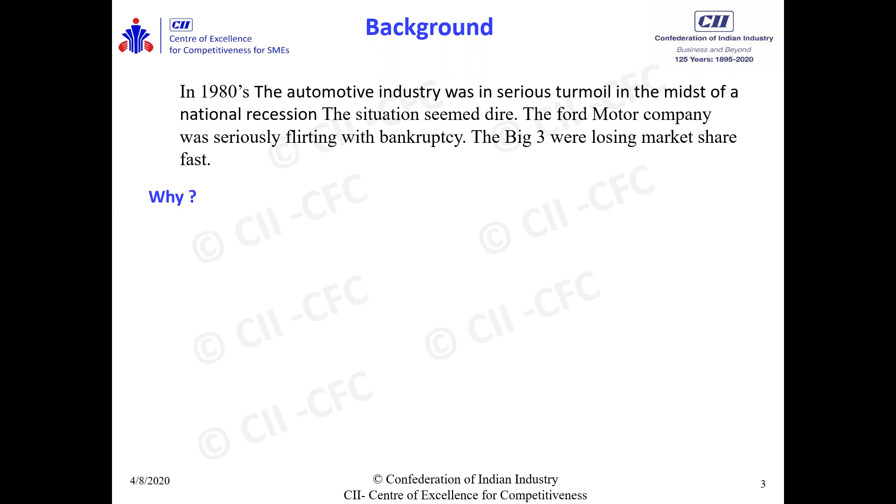So why do we need to study a Toyota production system? We'll understand this first. I'll give a background of how Toyota became important, back in the 1980s. I'll give a scenario in the 1980s when the automotive industry had a serious problem with respect to business. There was a big recession going on, and the big giants like General Motors, Ford, and Chrysler were struggling in the business.

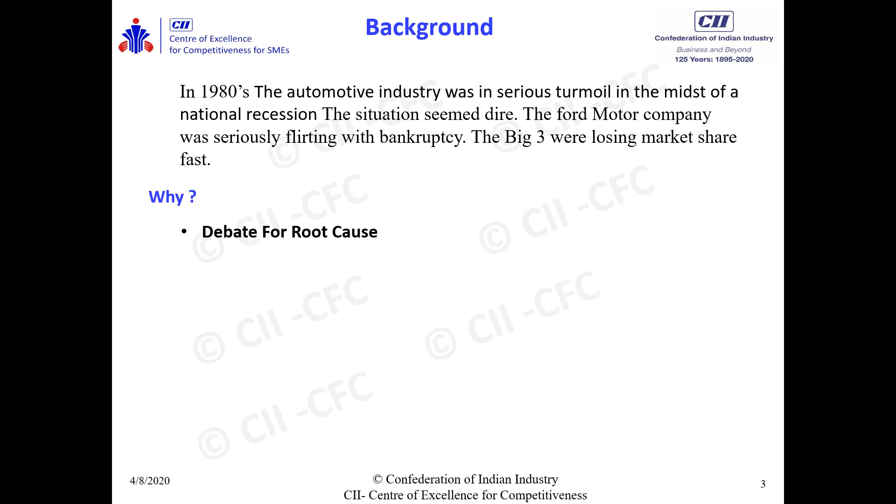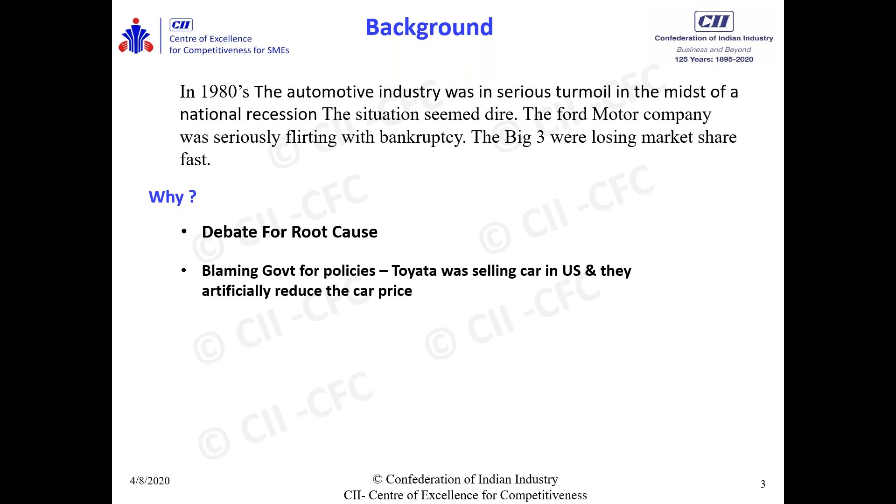They were on the serious verge of bankruptcy, and at the same time Toyota was doing good. When the debate was going on about the scenario happening with all the big three giants leading the auto industry, the debate was on root cause, and they started blaming the government, because Toyota was selling cars in a big way and doing good. So they thought this was an artificial reduction of car prices. This is again very important to understand.

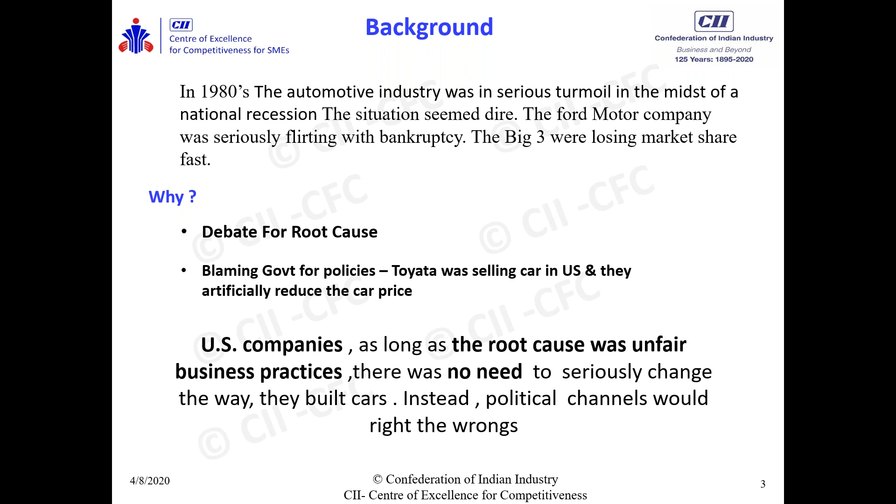So they put all the dimensions, or rather the thought processes, beyond their own purview - we normally call this an external factor. If we consider only external factors and not internal factors, the opportunity for improvement will not be there, the thought process to do something will not be there. That's exactly what was happening with all these big three. They also thought the root cause was unfair business practices, that Toyota was intentionally doing this to grab market share.

By the time they understood this, it took 10 years, and they woke up. They understood the Japanese quality and concluded the quality was good, and concluded they had to internalize why they were in a bad state. They started benchmarking the production system, product development system, supplier relationship management of Toyota - the entire process they were able to expose about Toyota, they tried to study during that time. It's not only an external factor - only blaming the government will not solve the problem. They had to understand the nitty-gritties of how others, how Toyota, were doing good, and then do a course correction on that.

At the same time, around 40 Toyota managers working in the US got interviewed to identify how they were working, and what mode of principles they were following.

So, at the same time, in 1991, Mr. John Chappell and Jeffrey K. Liker were assigned a job to create a case study to understand in totality what the scenario was at Toyota.

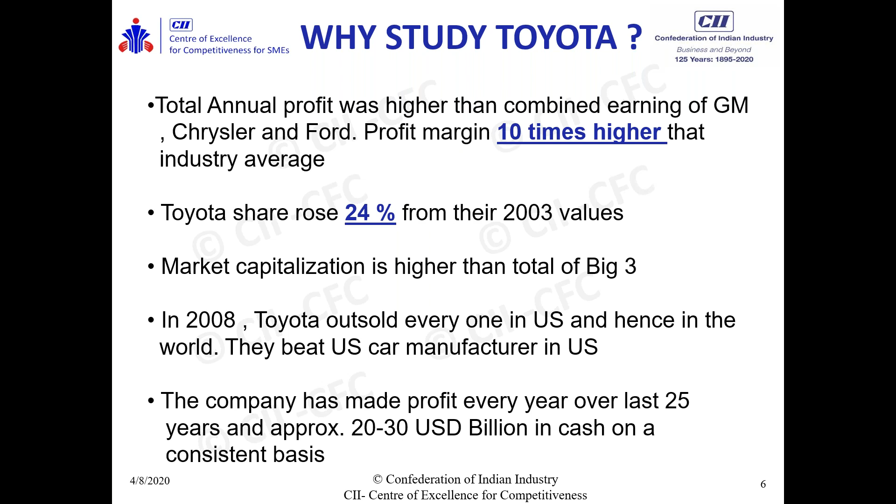endorsing that Toyota's system is good. Toyota Lexus was #1 in the world, followed by Porsche, BMW, and Honda. Not a single Toyota car was in the list of vehicles to avoid. Vehicle to avoid means Toyota was meeting all the safety norms needed for a car, and they are not in that list, and that is also visible there.

So it's a financial gain. Another one is quality, and the third one is the safety of the product. So in all dimensions, Toyota was doing good.

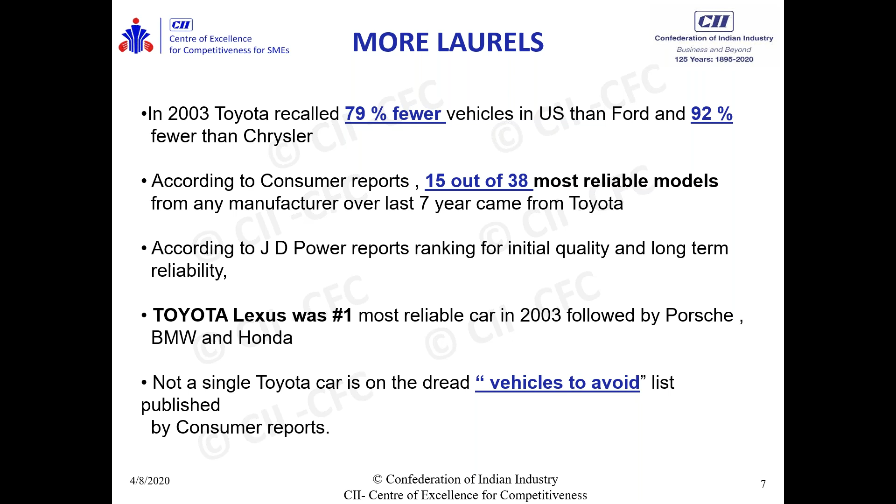So this is important for everybody to understand how Toyota made this big change. Taiichi Ohno believed that what is important is having elements together as a system. It must be practiced every day in a consistent manner.

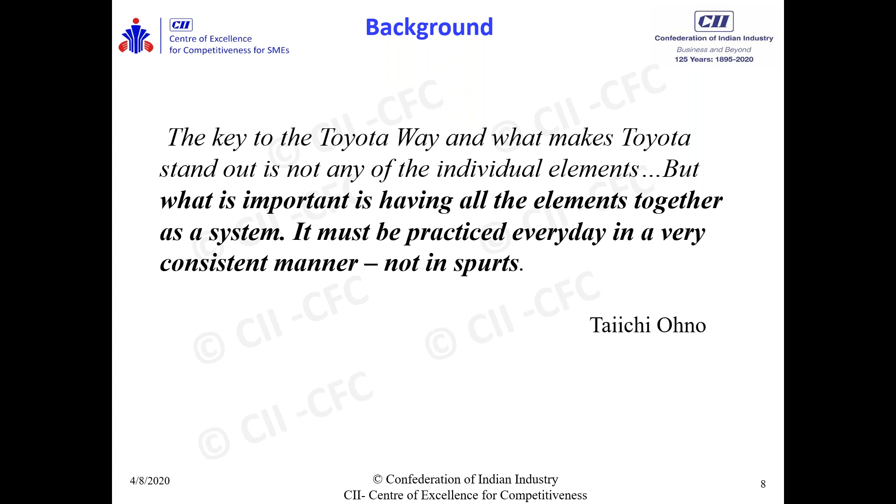It's very important, from the entire business operations or business processes, to identify every individual element—important or not important, it doesn't make any difference. Whatever system we design should be practiced every day in a consistent manner, not situationally. Because if we talk about quality, in normal practice we are not consistent in practicing the system. If we become consistent in practicing the system, nobody will stop anybody from growing. This is what Taiichi Ohno said.

We always talk about competition, and competition is changing day by day. There was competition, there is competition, and there will be competition. Even during the COVID period, we learned a lot. So the scenario is changing, and challenges are getting reframed—challenges also come differently as time goes.

Market leaders who are there today—we witness many leaders are not there anymore. Many people become a leader overnight, in a very small span of time. Opportunities are huge. People are coming up with different business models, exploring how business can grow, or how new dimensions can be brought to a business.

So if we don't think about this competitive age today, if we are not adapting the best practices that the entire world is following, we will not be there in the market. So when we say this is a competitive market, we need a holistic approach to see all the dimensions. So let me tell you a history of Toyota.

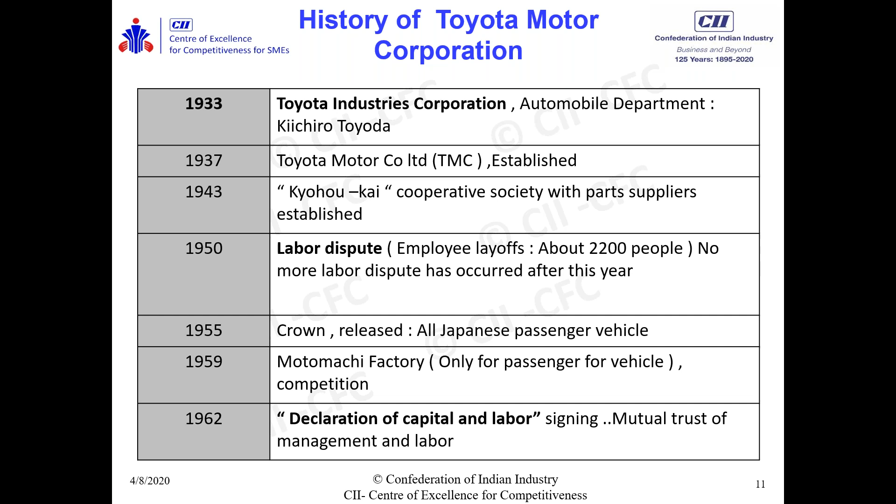So largely they are leading in many aspects. If you see, they started practicing TPS in the real sense. They adopted the Kanban system, they worked on inventory. Taiichi Ohno had good real practical implementation on the shop floor. They grabbed the Deming Award. They had a joint venture with General Motors in America—that is what I said, in 1984.

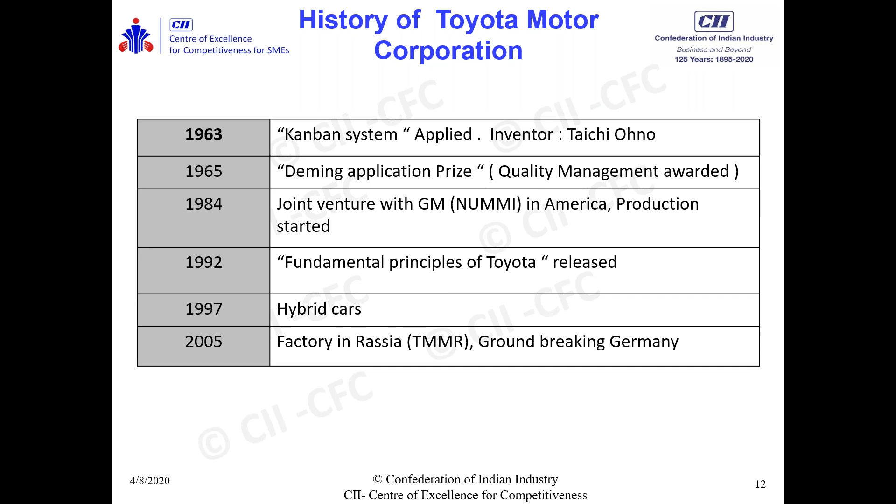Jeffrey K. Liker and two other university professors started doing a study with the managers when they got an opportunity during Toyota's business in Germany. So in 1992, the fundamental principles of Toyota got established. They also evolved hybrid cars, and the journey went on.

The Toyota production system was developed through tireless trials and errors at Toyota. They did a lot of work to establish the system. If you ask me, many companies have visited Toyota, but they don't become Toyota. There is a reason behind it. It's all about culture.

If I quote Taiichi Ohno, he also says all elements together in a system should be practiced, and it should be in a consistent manner. That is what culture is. That is what discipline is.

Sakichi Toyoda is the founder of Toyota Industries. He is also called the father of the Japanese industrial revolution. He started his career in loom manufacturing, and he is the founder of the automatic loom at that time.

The approach of learning and becoming an integral part of TPS, that Genchi Genbutsu, we'll discuss that. He invented a special mechanism to automatically stop the loom whenever the thread broke, whenever there were quality issues appearing, so the machines could automatically get stopped, evolved by Sakichi Toyoda.

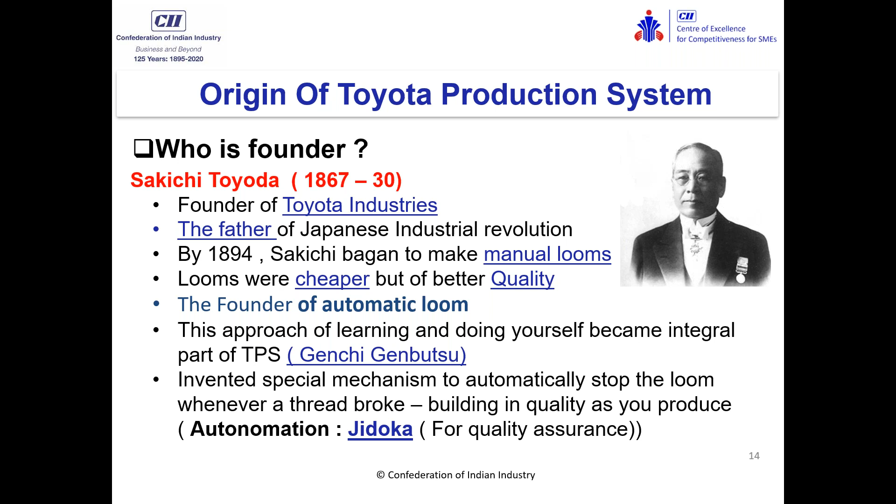That we call autonomation. We'll discuss about that, Jidoka and autonomation and all.

Kiichiro Toyoda was the founder of Toyota Motor Corporation, the automobile industry. So if you ask me, TPS got started and evolved from a loom manufacturing company. It got established certainly in the automotive industry, but TPS is not there for only automotive industry. We can practice all types of excellence practices in any type of industry. Who is manufacturing what doesn't make a difference. What's important is the methodology, tools, how to practice, how to adapt.

Mistake proofing, he brought mistake proofing into the organization. The most important thing was how he could build the plant, how he was able to put up the plant. Because he negotiated and sold a patent worth one lakh pounds to Platt Brothers in England, and he started putting money into building Toyota Motor Corporation.

He pursued production efficiency by JIT. If anybody has any question, they can raise it in between.

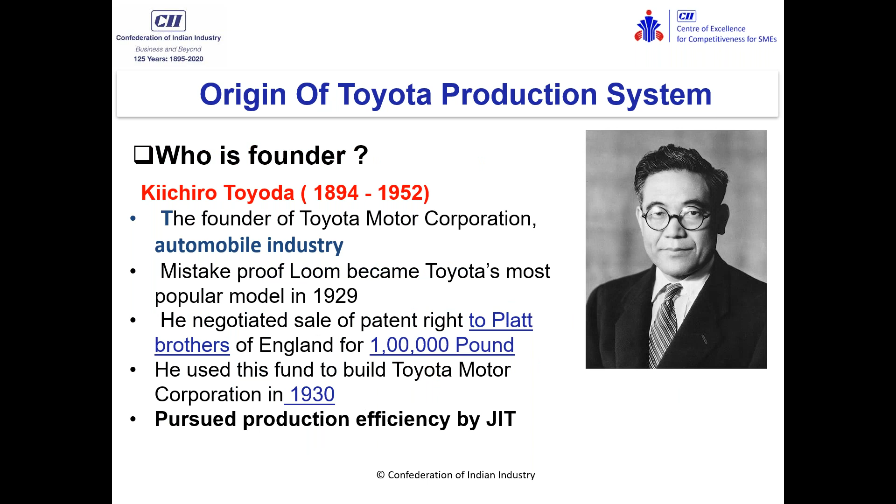So, when we are talking about Sakichi Toyoda and Kiichiro Toyoda, the real person who brought all these practices onto the shop floor is Mr. Taiichi Ohno. With support of Eiji Toyoda, Taiichi Ohno established TPS and created the basic framework for the just-in-time methodology, ensuring implementation of Jidoka and just-in-time methods and increasing productivity.

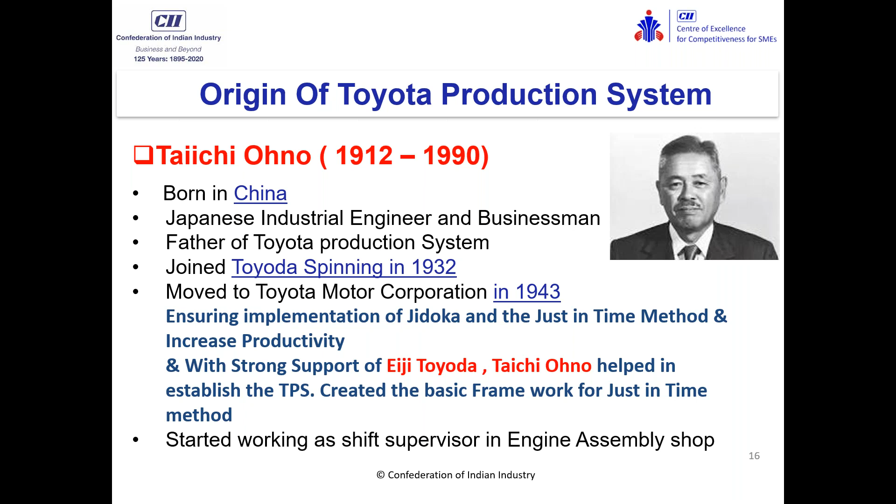The companies were able to see a result out of these practices. The start of TPS was, again, as I said, in the 1950s, they had labor issues. 2,200 employees were laid off. They had cutbacks. In Toyota's history, that was the first time this had happened. So the company pursued the importance of increasing profit, which became very important.

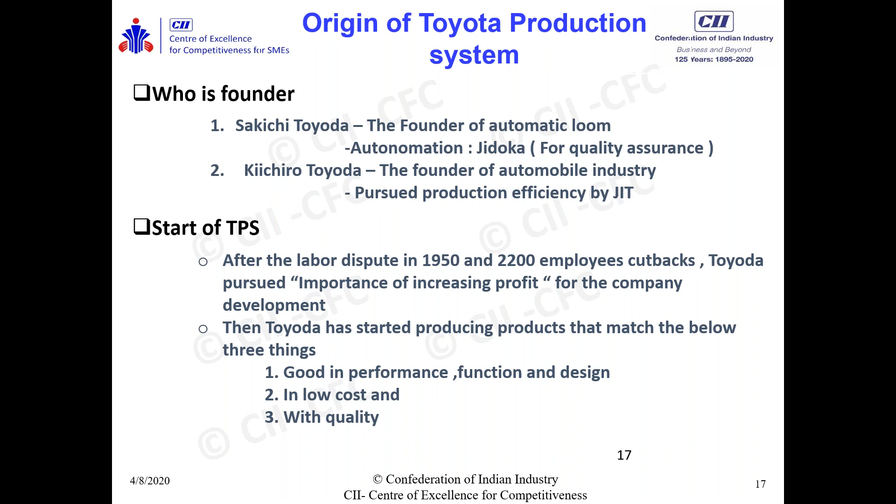Then Toyota started producing products that matched three important aspects: good performance, function, and design. It should be at a low cost and should meet quality standards. So if you ask me, performance normally means fit, finish, function, and aesthetic - all important, and it comes through design. So when it comes to product design and process design, in line with customer needs, it should be at a lower cost with the best-in-class quality.

So what are the principles they were working on? The cost principle was, as earlier, selling price equals cost plus profit. So profit was decided by the owner, cost is the actual cost, and the selling price got decided. Everybody knows this - deciding selling price by the management, not by the customer.

That is the cost principle. The non-cost principle is selling price minus cost, and selling price minus purchasing price minus production cost. That is what is variable cost or fixed cost, which we'll talk about.

So customer decides a selling price. This is a scenario that has changed. We need price setting to meet customer willingness to pay, to reduce production costs, and to create a shop floor that has a motivated employee who can contribute to reduction in manufacturing costs.

So there were three scenarios. Selling the product at a higher price than others. Another scenario is procuring parts and raw material at a lower price, with equipment which is cheaper, may or may not be capable, and labor at a lower price, lower cost. This is the second option.

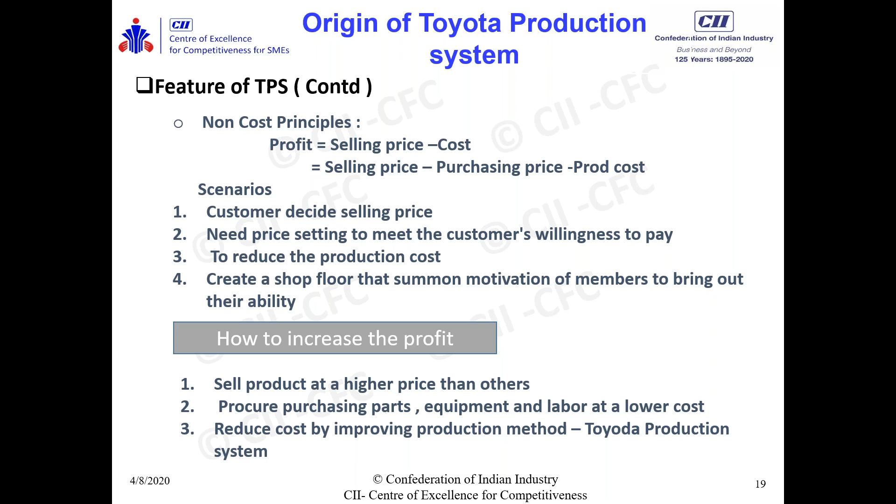The third one is reduce cost by improving the production method. That is what the Toyota Production System is.

So what about the initial two? If you see, selling price depends on market is difficult to deal with. If you are deciding on raw material, that will be in our control, we'll decide raw material cost, which equipment, maybe low efficient equipment, and labor at a lower price is not possible. It needs mutual understanding, and it's really difficult to deal with. So the only option remains is to deal with the cost, and that is through the Toyota Production System.

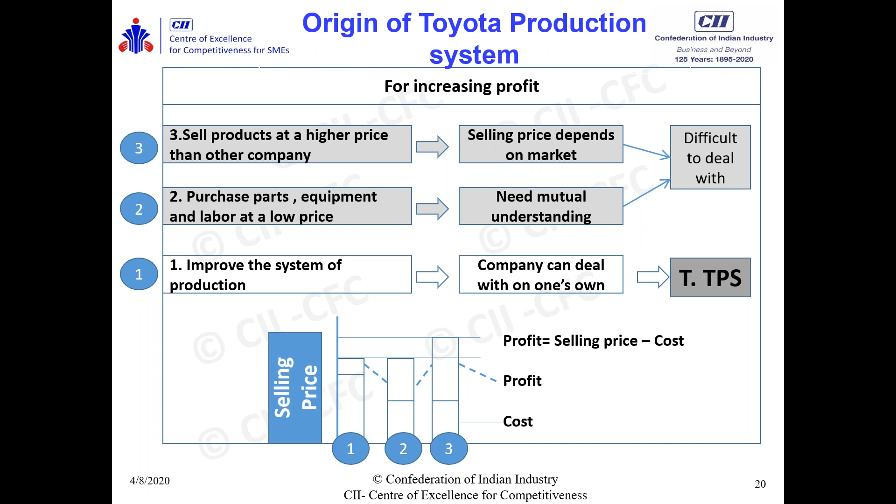So Toyota Production System evolves in phases. One is Toyota Production System, another is Toyota Production System in totality, so total TPS. We'll discuss that. So this is the cost principle we discuss.

Survival and prosperity is very, very important. Social responsibility and contribution is also important. So while working on cost, we have to address this, and we'll be able to be very competitive if we are addressing the basic fundamentals of Toyota, or fundamentals of excellence practices on a shop floor, or whatever way it does business, it will be helpful for everybody to build a profit.

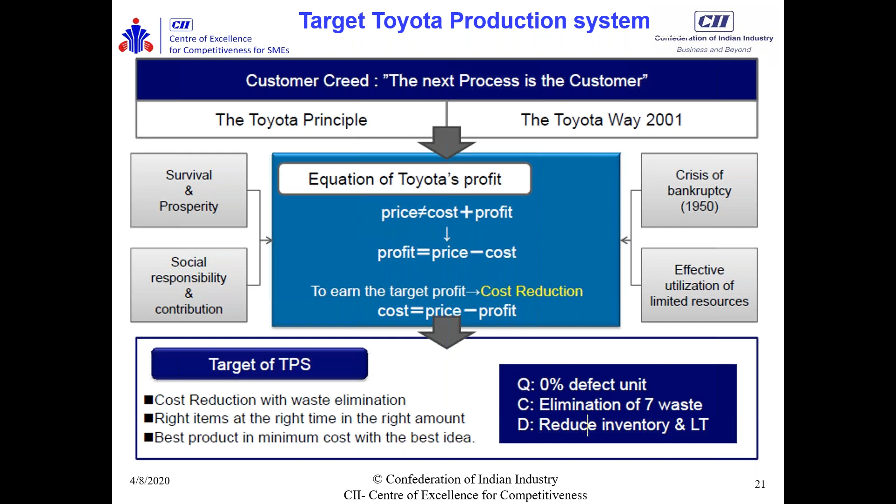So what is the target for TPS? Cost reduction through right item at right time, delivery on time in full, best product at minimum cost. Quality, which is zero defect quality, should not have any defect in the product. Cost is optimum, which the customer is ready to pay. Delivery is on time in full, when customer is asking we should be able to deliver the product. So that is QCD. When we talk about competitiveness, we always talk about quality, cost, delivery.

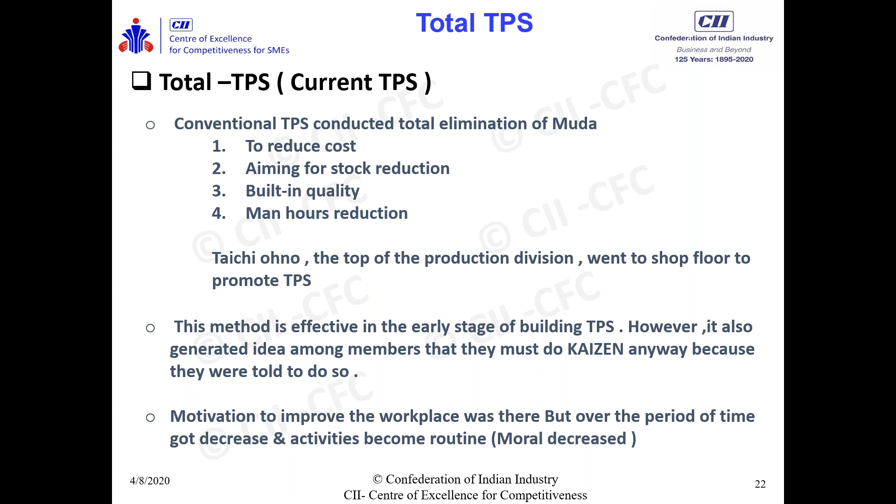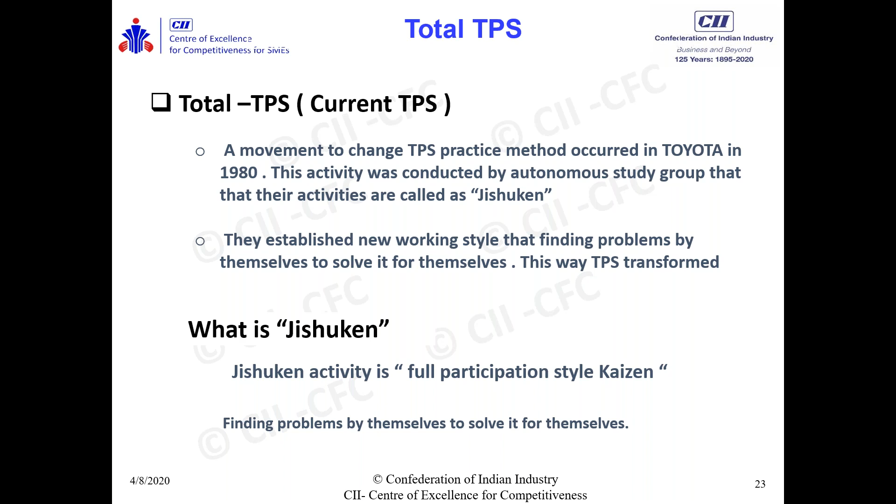So there was a movement to change the TPS practice method in Toyota in the 1980s. This activity was conducted by an autonomous study group, and that activity is called Jishuken. So Jishuken is all about full participation style kaizen. Full participation means everybody in the organization should participate in doing improvement. That is how Jishuken evolved. So finding problems by themselves and solving by themselves, this is also a mantra while doing this. So this is Jishuken.

So we normally say find it, fix it, it is one aspect of it. So TPS was talking about high quality, stock minimization, and cost reduction. High quality means build-in quality in every operation, and that was through Jidoka, more about visualization, adaptive control, and poka-yoke.

We also talked about when we need zero defect quality, we should build a process which is a zero defect process. The process should not have any element by which the operator can make a mistake. The error possibility which is there in the system or operation, we should eliminate that possibility. For that, Jidoka is the system, done through visualization, adaptive control, poka-yoke. There are many such tools available today.

Now stock minimization, so inventory. Stock is all about inventory. So many companies must be working on inventory, people must be monitoring ITR. If you ask me what ITR indicates, ITR shows the efficiency of the people. If you agree, you can raise your hand. It's the efficiency of the people who are buying the material, and it's the efficiency of the people who are manufacturing the operation. That is what ITR is.

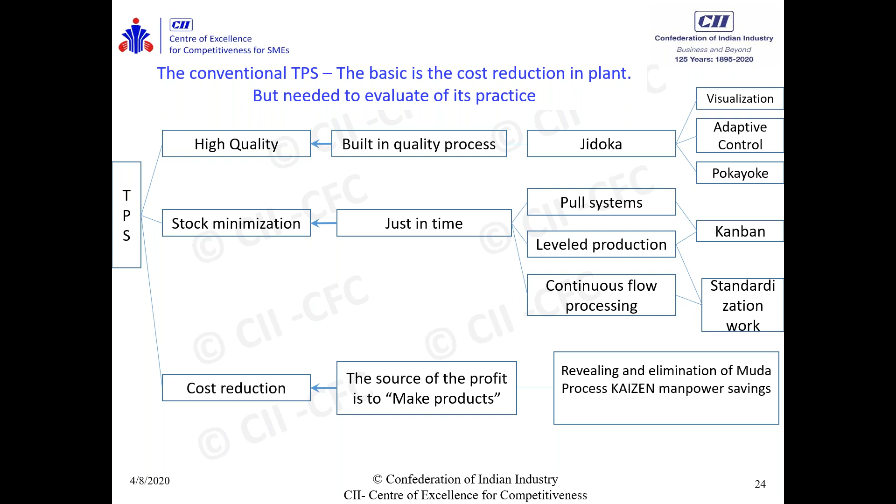If you ask me, conventional TPS and total TPS, there is a transformation. In particular workplace, the model process practices TPS in all divisions. Earlier this was only for production. Now this is total TPS in all functions of the business processes.

Even today, many industries are only demanding Kaizen from the production shop floor. There should be Kaizen in all functions. So are we demanding Kaizen or improvement in all the functions? The answer should be yes, and that should be the focus way we should do it. That is what total TPS is.

There is a system to involve employees. Earlier, uncooperative Kaizen or stretch Kaizen work was happening. Now in a very focused way, Kaizen lists have evolved - how to evolve a Kaizen, how to identify a Kaizen, how to identify opportunities for improvement. There is a separate session for that.

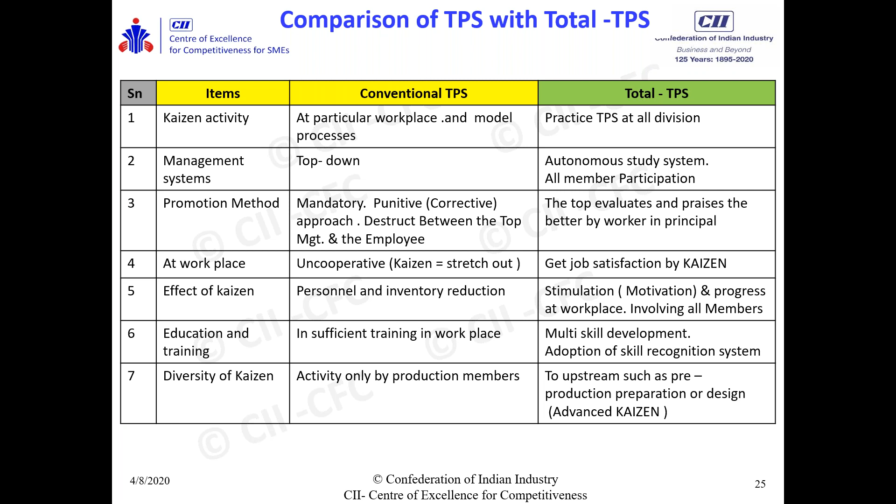TPS consists of three things: one is just in time, Jidoka, and process Kaizen. That is what is even mentioned. We'll have some brief discussion about all these three.

The TPS evolution from conventional TPS in particular manner involves stimulation of the workplace, and pursuing job satisfaction by Kaizen that involves everyone in the organization. When we talk about stimulation of workplace and pursuing job satisfaction, what largely comes to mind must be workstation design, ergonomical workstation design. That is what is stimulation of workplace, stimulation of work where the operator gets involved.

It is in various functions. People have to have their job satisfaction while working there in the organization. It's not like - even in many companies today, workplace stimulation doesn't happen. Even when a new product comes in, or any new operation needs to be evolved, or we need to put one operation there in the process and need a table.

Normally it happens like somebody - a carpenter or welder - is designing, somebody is making a sketch, they are preparing it, and it's directly coming to the shop floor. It's not like that. It's really giving a thought process in a standardized way to design a workstation which is ergonomical in nature, which will give job satisfaction to the employee, which will also help the employee to give more ideas to improve.

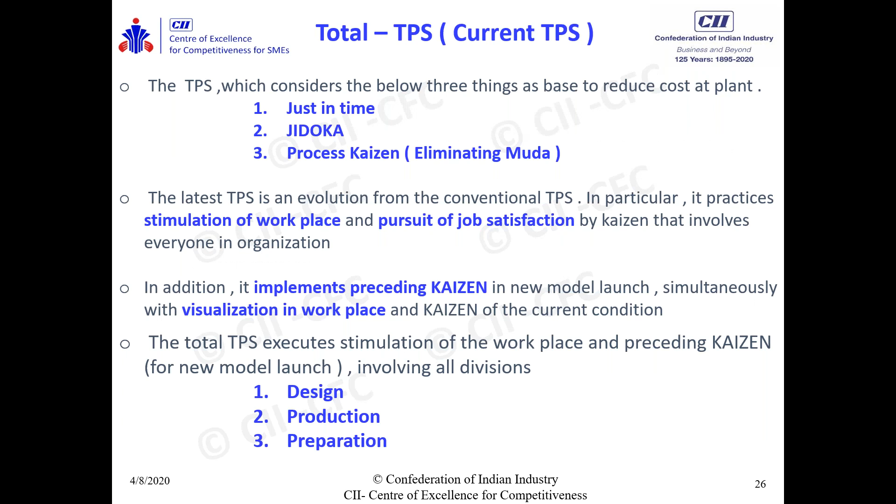So requirement of JIT. Toyota is talking about JIT and Jidoka, just in time and Jidoka. So continuous process flow based on whatever we manufacture should be based on takt time. If you ask about the flow, there are various tools available. We say cellular layout, ergonomic workstation is definitely needed. Layout which is flexible, flexibility in our changeover, that is what SMED is coming in picture.

Inventory reduction, there is a strategic approach for inventory reduction. There is some system and methodology available to reduce inventory stock, that is raw material stock. Inventory has three areas: one is raw material, WIP and FG. FG at our end, FG at a godown, FG at a supply chain. So all is FG. Continuous process flow across the chain.

Whatever we manufacture should be based on takt time. It should be determined based on the quantity that is needed. Decide the production quantity as per day's requirement, market requirement. Decide the standardized work and observe it. So when we talk about manufacturing based on takt time, we should have standardized work content. We'll discuss that when we talk about the principles of that now.

The following process draws from the previous process the part to be used. There should not be inventory in between. So we should have a pull system with Kanban and Heijunka, which talks about leveling the production schedule of the parts in the entire chain. Heijunka talks about leveling of production across the entire system. Minimize the lot size, which normally we say single piece flow should be practiced there in the organization.

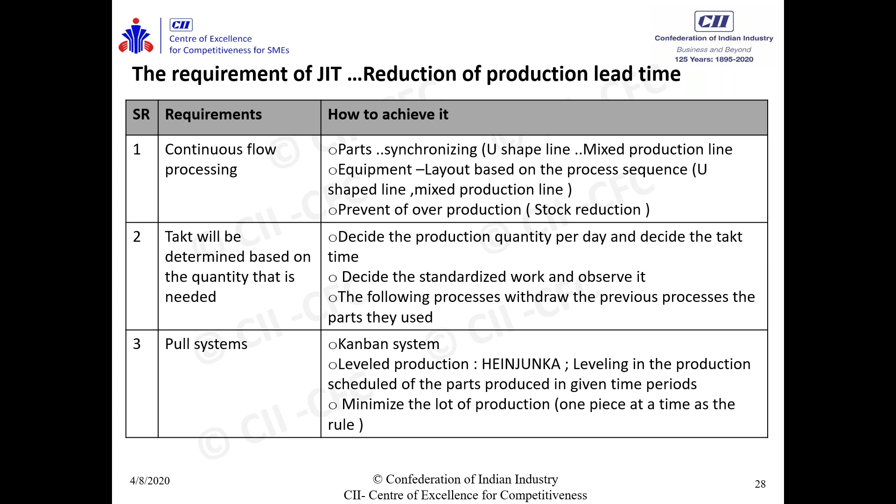So Heijunka is talking about one at a time, all the time. There are two main pillars when TPS got evolved. One is JIT, just in time, which we discussed about. It talks about lead time reduction, working based on our takt time. The latter process takes from the earlier process, so inventory should not be there in between operations. You must be witnessing, if there is inventory in between operations, definitely it adds cost to a company. It is NVA, it adds non-value-add for the operator.

Response time to the next operation is very less. It also occupies space in the organization. If we are working with inventory there in the organization, we may have different varieties of business models. You may not be in auto industry, but this is not only applicable in auto industry, it is applicable across all types of manufacturing. There may be some limitation when a special process comes into picture, but people have overcome such special processes. Like earlier days hardening was with batch production, now many companies have evolved to single piece flow.

The important thing is understanding just in time: what is needed, when needed, how much needed. Based on these three things, we should have our manufacturing system there in the organization. It can be supported with Kanban, and it can be further improved with the principles of leveling of production.

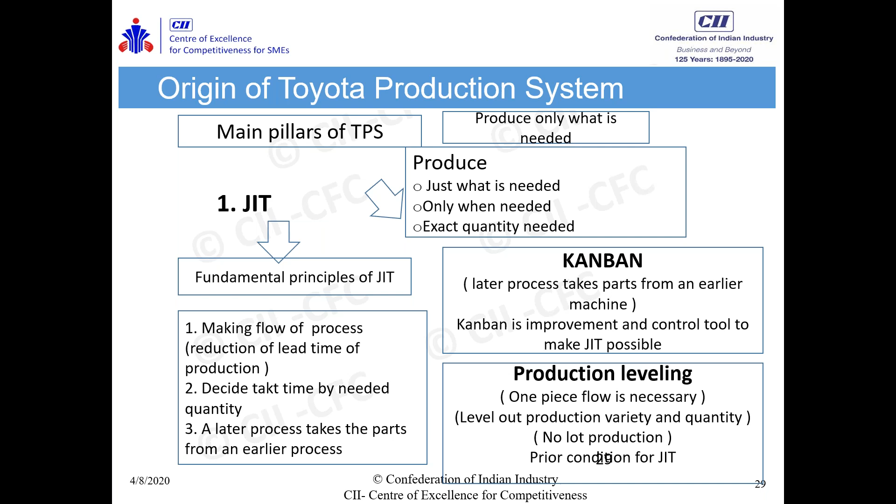So no batches in between, like that. You must be knowing also the push system. What is happening in between operations: the earlier process produces more, delivers the part, without watching the status of the later process. There are problems, everybody understands this, but are we practicing this? I'm leaving this question: are we practicing this 100% across the chain? That is what is a commitment, that is what is a discipline.

So we should not have push. If there is a demand in the market, that vacuum will get created, that will come as an order to produce. We should produce that, we should dispatch that. We should not anticipate the market and produce those parts. If you are anticipating and producing, or anticipating some problem in the operations and producing, like sometimes some machines are not reliable, so we keep on producing.

That builds inventory. So we should not have inventory, and if you have inventory in operations, that will not surface the problems. If you want to make our system more efficient, more vibrant, more visible in various aspects, we should not have stock in the system. We'll discuss about this again.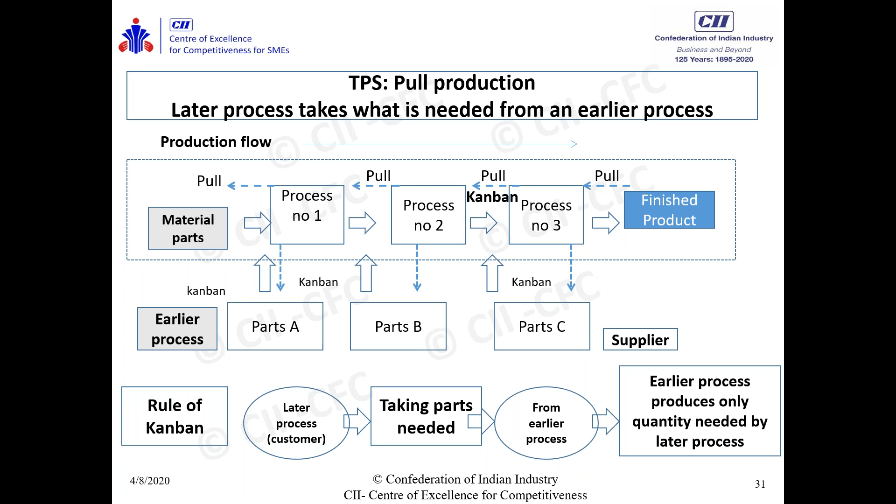So what is Jidoka? We are talking about just in time. Just in time is giving a customer whatever they want, when they want. So we talk about three things.

One is what customer needed, when needed, how much needed. That much only we need to produce, and we should be capable enough, our entire production line or entire system should be able to deliver that in a just in time way.

When we are talking about just in time, a very important aspect is lead time. Based on takt time, we should produce. The latter processes or earlier processes should not produce unnecessarily when there is no need.

So Jidoka is talking about developing the production lines. Do not introduce equipment or a robot only to save labor. This may sound contradictory, but it is very important to understand.

When we already have an existing line available, unless we have really done a PDC or option analysis, we should not invest money into a line. That may increase the cost of the product. So this is one of the principles coming through Jidoka.

It's developing a production line to meet the customer demand, or developing the production line to improve our productivity of the entire line. The purpose of developing a line is to produce a good product at a lower cost.

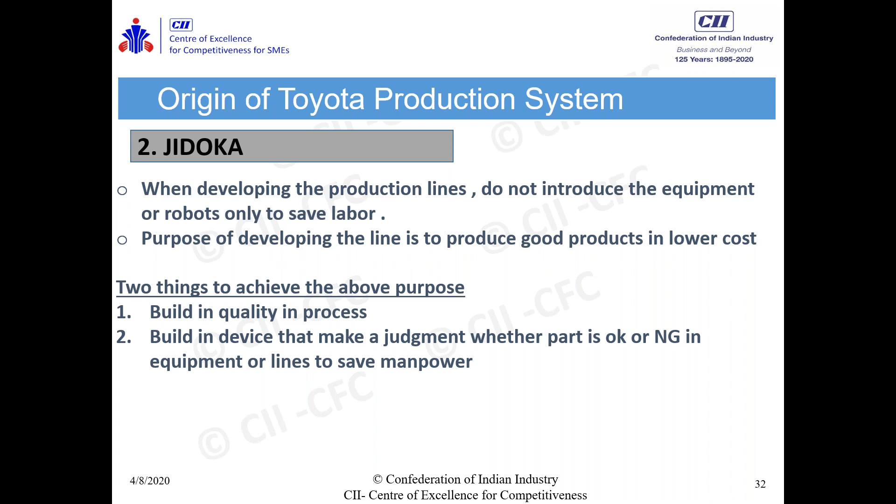So auto-stop, alarming there, when we are talking about putting judgment activity with the machine - we now use many sensors. If temperature goes down, there is an alarm. If the temperature goes down, the conveyor gets stopped. That is what auto-stop is, so that things can be repaired without being dependent on manpower.

So Jidoka talks about auto-stop, or this is also mistake proofing, like adaptive control - because of this feature, the machine automatically handles things by itself. In a normal scenario, there is no need to monitor the equipment all the time. Our machine should be intelligent enough that if anything happens, the machine itself should be able to tell us if there is any abnormality appearing.

Jidoka is also promoting one-man multi-machine, which is also important when we are talking about Jidoka. This will accelerate the reduction in process, dramatically improve quality assurance, and improve production efficiency.

So when we are talking about Jidoka, it's all about putting mistake proofing there, adaptive control in the system, removing man's decision power from the entire system, making it more automatic, or giving the signal to the relevant people, the relevant management team in the organization, which will accelerate building quality into the processes.

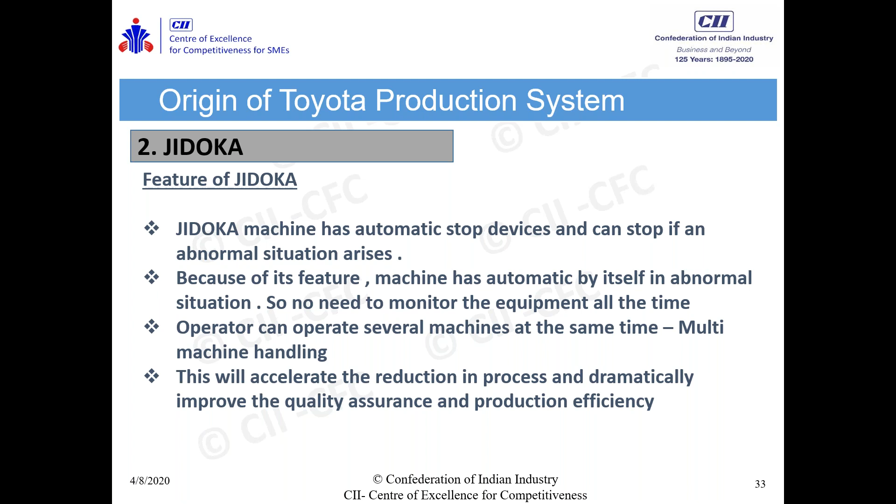A one-man multi-machine concept, or addressing skill and making a robust system wherein the man's idle time got removed and his work allocation got balanced - that can help us in putting a system of one-man multi-machine, which will also help us in improving productivity. What is against the Jidoka?

What should not be there in the system? If the assembly line does not stop when the problem happens, such as a defective coming into the system, that is against Jidoka. What happens in many industries is that if any rejection happens, it goes to the next process, passing from one process to another, resulting in repair at the end.

We should not have that. We should stop the line. So Toyota is also talking about a stopping culture. The defective should not go to the next process. It can become chronic, and an inspector or repair line will be needed at the end of the line, which is against Jidoka. So if a company has any repair station, specific or isolated, within the line or at the end of the line, it is not advisable when we talk about Toyota Production System. That is against Jidoka.

So they also evolved the role of the supervisor: eliminate the causes which are not supporting the line immediately, improve it. Whatever problems arise should get addressed and improved to the next level. The opportunity should be identified, countermeasures applied, and the operation standardized so that repeatability of the operation will be ensured.

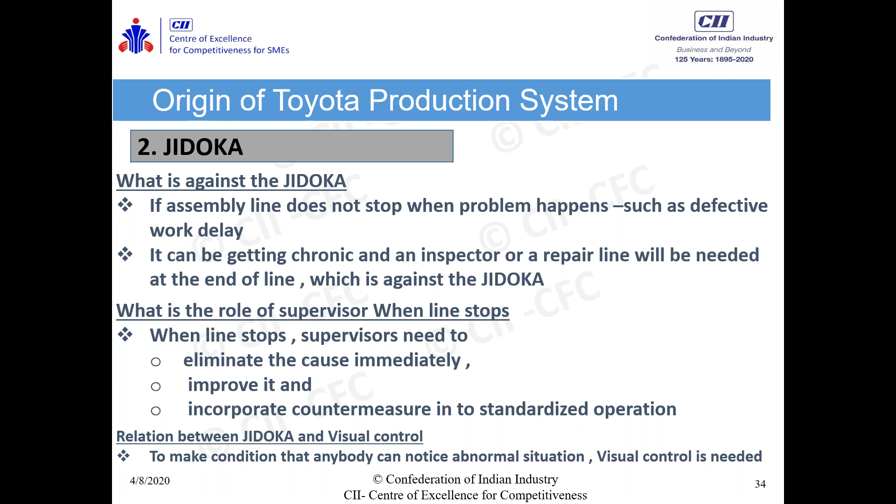So Jidoka is talking about a very close relation between visual management and Jidoka. To make a condition where anybody can notice what is abnormal in nature is visual control, and that is needed in many places. So if you ask me about visual control, it's all about: except man, everything should talk. That is what visual control is, and there are ways and means of doing it.

So Jidoka is also talking about building quality, which we already discussed: stop when the abnormality occurs. We should not run the line.

Able to see abnormality - now this is very important. All the members associated with production, are they able to identify abnormality? Are they knowing how to identify abnormality? Are they knowing about the abnormality at all? So it's very important to give them a platform or educate them to identify abnormality. If they are not able to identify or know the abnormality, they will not be able to tell about it.

So the requirement is ability to see abnormality by man, and ability to address or detect that abnormality by machine. So automatic check devices in the line is how it can be achieved. Workers stop the line when abnormality occurs, and machines alarm when abnormalities are there in the system.

So there is a manpower saving here, but now we are talking about optimization of manpower. Flexible manpower is definitely needed - eliminate workers just watching a machine. At that time, two things got evolved when we talk about basic TPS: one is waiting time, another is idle time. Nobody should wait in the factory - except for man, there is man waiting, machine waiting, material waiting, which should not be there.

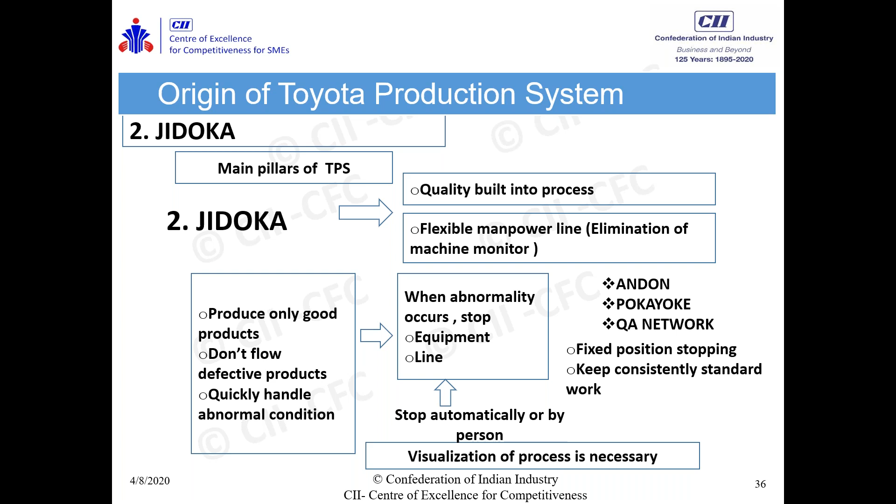Many times it happens that there is a customer requirement, so there is urgency. If there is a quality issue, what the company does is reduce the speed of the machine. This should not be the case - that is what is needed.

So to prevent making defectives, don't flow defectives to a later process. Here we also evolved some systems like: will not accept the defect, will not pass the defect, will not generate the defect - so accept, generate, and pass. If anything happens there, I'll inspect and I'll stop. This should be mapped to make this happen.

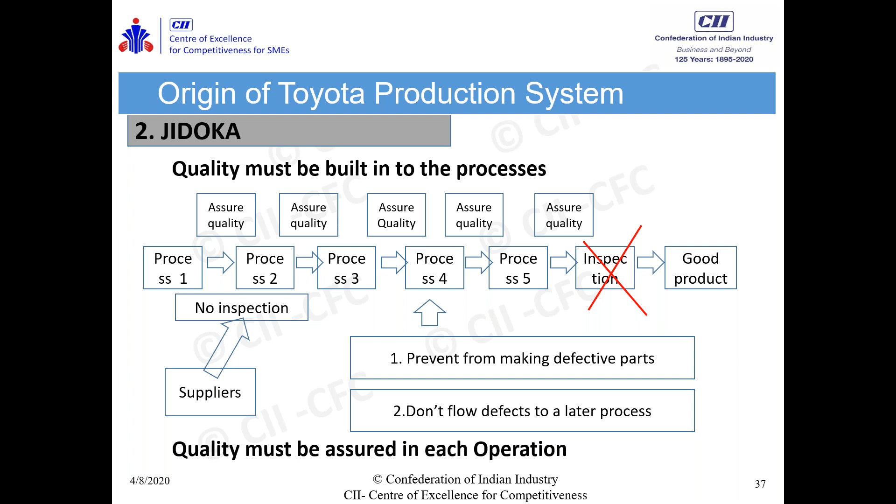The difference between automation and autonomation is very important to understand. Automation is introduction of machines and equipment, such as special purpose machines, where human effort or human energy is getting reduced. Autonomation is all about building human intelligence into machines. What a man can make a mistake, the machine gets identified and the machine corrects itself. That is what is meant by autonomation.

We should practice, evolve, and explore this in the organization. Autonomation also talks about an alarm when abnormality comes. If it's not corrected, there can be an alarm. If the abnormality is there, the machine should stop.

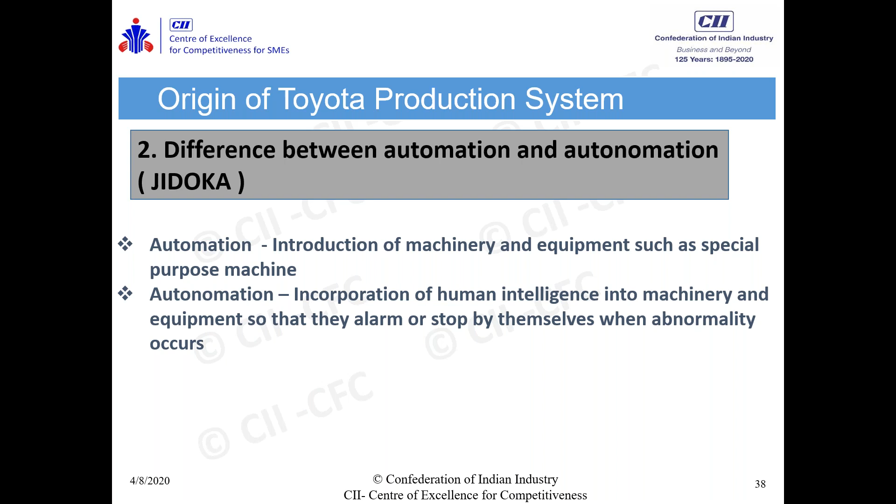We discussed about the two main pillars of TPS, that is JIT and JIDOKA. Just in time means whenever needed, and how much needed, that much we will produce. Transfer human intelligence to an automated machine. Build quality into operation, instead of process I am talking about operation, since multiple operations make a process. Stop the machine when abnormality occurs. Don't run production if there is a problem.

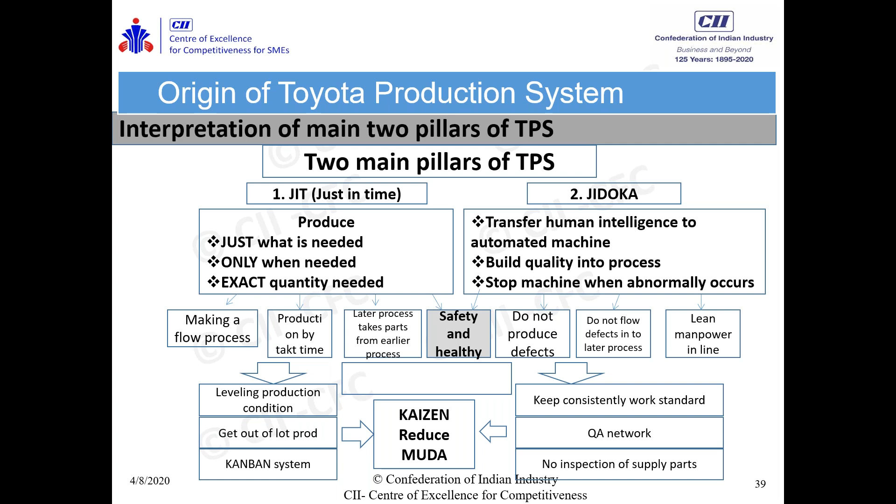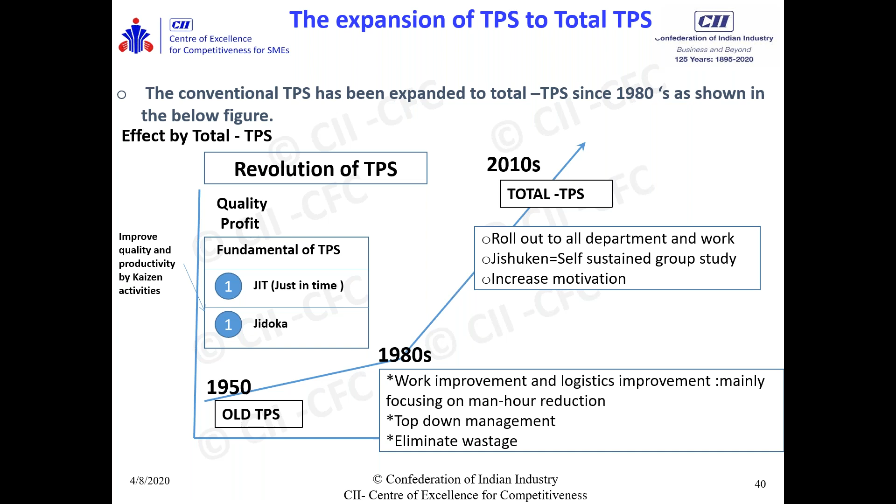There is an evolution of TPS over time. In the 1950s there were two principles, JIT and JIDOKA. In the 1980s some more evolved, and by 2010 a holistic TPS got evolved by Toyota. This is just a glimpse of that holistic approach, not maybe in totality.

If you ask about a thriving factory, the basic fundamental of 5S should be there. QC activities should be there in the organization. Innovations, skill certification, visualization, process improvement, independent study groups - that is what is Jishuken. And manufacturing division meetings, various meetings. We should graduate from the conventional approach.

TPS involves simultaneous engineering. Simulation can be in various aspects, various places - manufacturing plants, equipment design. It talks about equipment design, process design, product design, QA/QC integration in the system, operation process chart creation, standard work content.

There are many dimensions that have evolved in the total Toyota production system. This is just a glimpse of the bullet points. So total optimization - the efficiency of each level, such as individual lines or factory, would be improved. Efficiency improvement is only meaningful if it brings cost reduction. Only the necessary number of items should be produced with the minimum number of operators.

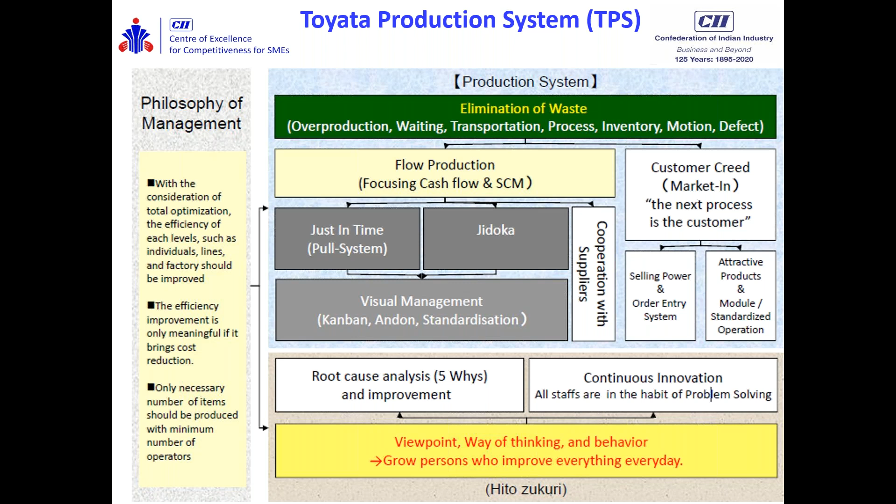So there is JIDOKA, there is visual management systems, and all that. This is what is the TPS house. We'll have a detailed discussion about certain practices of TPS.

If you see Toyota philosophy, it's always with visual management. Visual management consists of 5S, along with safety also added, so visual management with 6S. Visual management itself is a big topic. When I say visual management, I mean except for man, everything should talk - so you don't need a supervisor there.

If we are able to build the system in terms of making the factory visual, it's not only about coloring the factory. If I want to take inventory of, let's say, 100 crore rupees worth of inventory, it should be available in hours' time. The material should tell me how much I have. That is the level of visual management - what to produce, when to produce.

Visual management needs to be practiced in various departments, various functions, not only in production. If you ask me about HR, there are many legal statutory requirements - are they visibly available? If the plant manager, HR manager, or the person handling legal and statutory matters is not there due to exigency, is that visible somewhere? The person should be able to identify an abnormal scenario with respect to legal statutory requirements that may arise because of non-availability of the person.

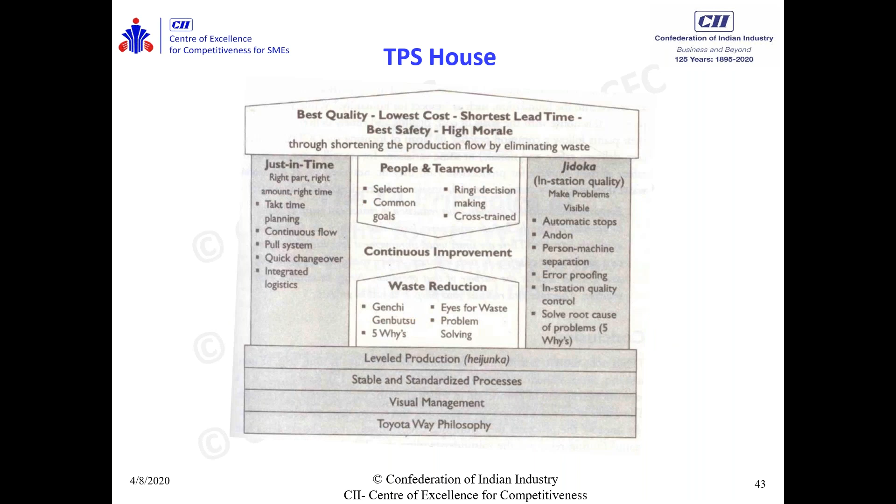So I'll just brief you about the 4P model of TPS, which is in line with the Toyota Production System. The 4P model of TPS is all about philosophy, process, people and partners, and problem solving.

Philosophy is a long-term philosophy, that is all about the strategy. Unless and until an organization has a strategy, the organization cannot grow. They talk about a philosophy that is long-term thinking. Thinking can be 1 year, 2 year, 3 year, 4 year, 5 years, but certainly the organization should have a strategy to grow.

Should be minimum 5 years. Certainly, if I want to make a plan for 5 years, it should be broken down in years: first year, second year, third year, fourth year, and fifth year, in a systematic way. So processes we'll be discussing.

People and partners are very, very important to grow. This is the principle, rather the model which TPS adopted or followed. Problem solving is not remote - it means going to the Gemba, doing Gemba, Genchi, and Genbutsu. All three should be followed when we are talking about problem solving techniques.

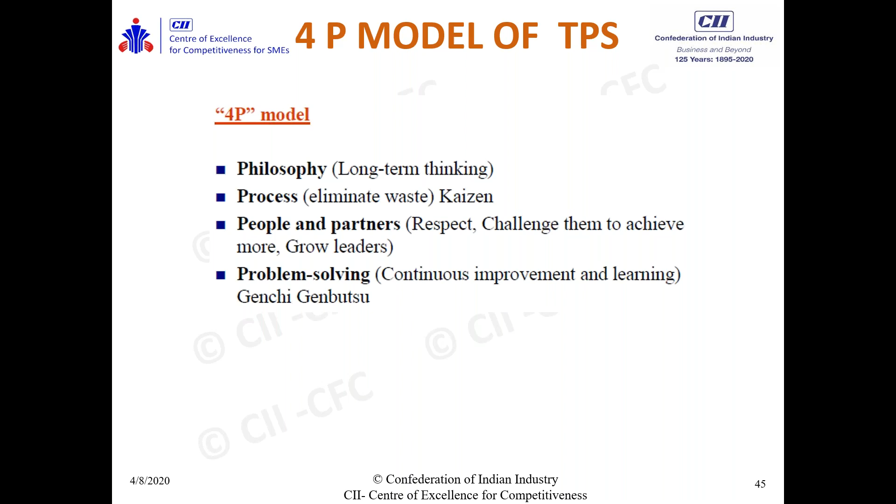So when we are talking about 4P, that is problem solving, people and partner, process and philosophy. It has a challenge - that is philosophy, improvement or Kaizen - that is process and people, respect and teamwork - that is people, and Genchi and Genbutsu is for the problem solving tool.

Gemba is the actual workplace, Genchi means the actual problem. I'll elaborate about Gemba, Genchi, and Genbutsu - these are all Japanese words. Gemba is workplace, Genchi is actual problem, Genbutsu is take a realistic action for the problem - realistic action meaning the action which will kill the problem. So these are the 3 words: Gemba, Genchi, and Genbutsu.

So problem solving should happen on the Gemba, not remotely. Sitting in a conference room, getting only information, not witnessing the real condition there, how things are happening, and framing out the problem statement and working on it will not give a solution. So that is why 3G is important for a problem solving approach or technique to solve any problem.

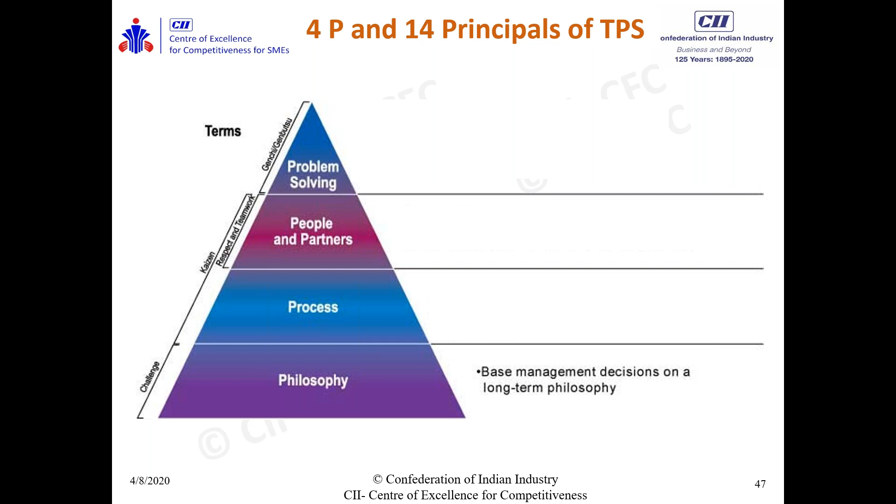So this is the 4P, and we are going to talk about the 14 principles of Toyota now. Philosophy is about the base management decisions on long-term philosophy. We'll discuss this in totality - rather, I'll give some more time on this.

So process has other principles when we are talking about a robust process, building a robust process. There are questions people are asking. First question is: are you audible? You can - from Mr. Chandan Singh - what is Muda?

Muda is NVA - Non-Value Add. We talk about NVA, that is Muda. The activity which the customer is not paying for is a Muda.

Mr. Rameshwar Roy is asking: sometimes due to poor availability of labor, companies hire unskilled labor from the market and it puts an impact on production as well as quality. In this situation, what strategies can be taken?

When we are talking about unskilled labor, my answer is this scenario will be there forever. Even though we have 130 crore population in India, we will not be able to get the right people - unskilled people will be there. What is important for us is the internal factor.

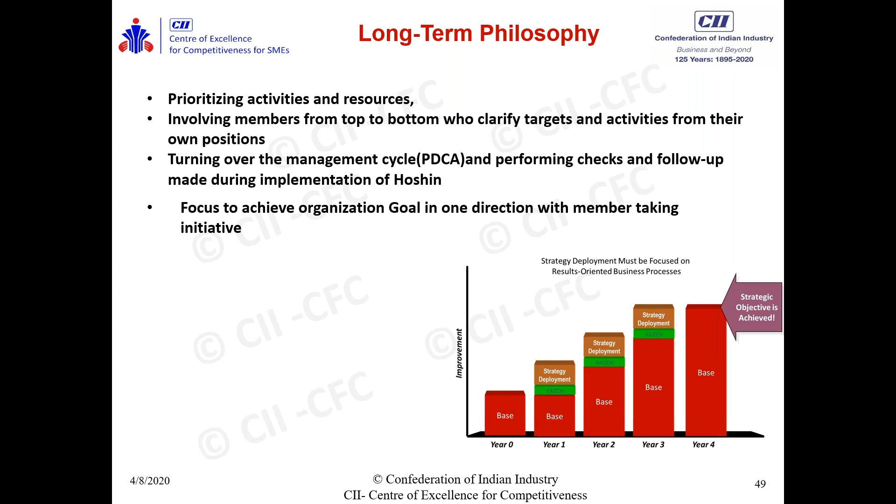So strategy deployment will be good, MBO will also be good. So please adopt this strategy deployment, that is what Hoshin Kanri is, or in another organization it must be something different. We also conduct this session in a full day, for putting policy deployment there in the organization.

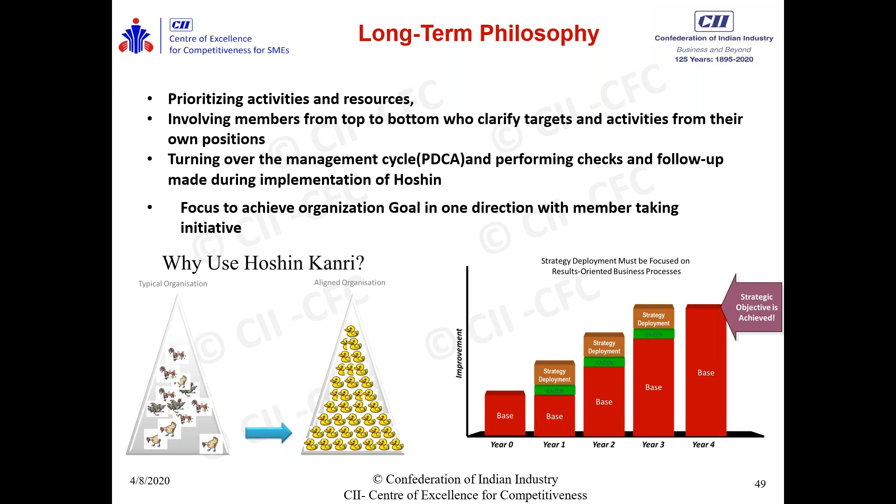So what is a typical organization? Everybody is working in silos, they're not aligned to a common goal. So you can see from this picture, you must be knowing there is a volumetric loss when there is corrosion there in a pipeline, when air distribution is happening, right? If there is air in air distribution, corrosion is there inside the pipe, there is volumetric loss, the pressure which is there at the generation point is 6 bar,

you will be able to get only 5.5 bar because of volumetric loss, because the flow which should be uniform is not uniform. In a similar manner, if everything gets aligned, and there is a focused goal, you'll get a high performance result, the best result. In low performance, that typical case where people are working in different directions, clarity of vision is a problem, more of an opinion-based decision, blaming culture. Many companies have that. So if there's success, it's mine, and if there's failure, somebody else will adopt the failure.

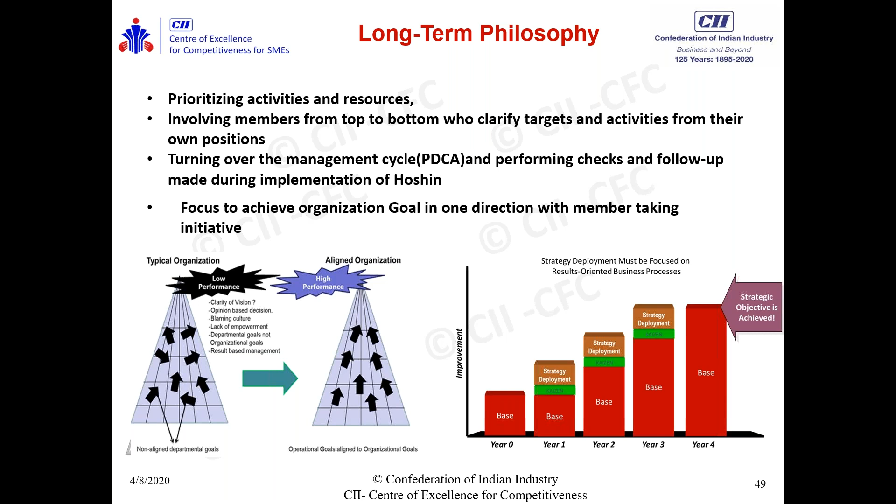Departmental goals not meeting organizational goals, more about results based on outcomes. So if you ask me, long-term philosophy has to be addressed in a holistic way.

This should be viewed from 3 different ways. At top management, maybe at organization level, if it is a different plant, there should be a view of this vision. Target should be at a plant level, department level, function level, individual level, and there should be an interlink between each other.

Like if somebody is designing a product, they should also get linked with manufacturing, because when designing a product, if ease of manufacturing is not addressed in product designing, your cost is going to increase.

So that alignment is very important, which comes through strategy planning needed for the organization, and that comes through the vision and mission statement of the organization.

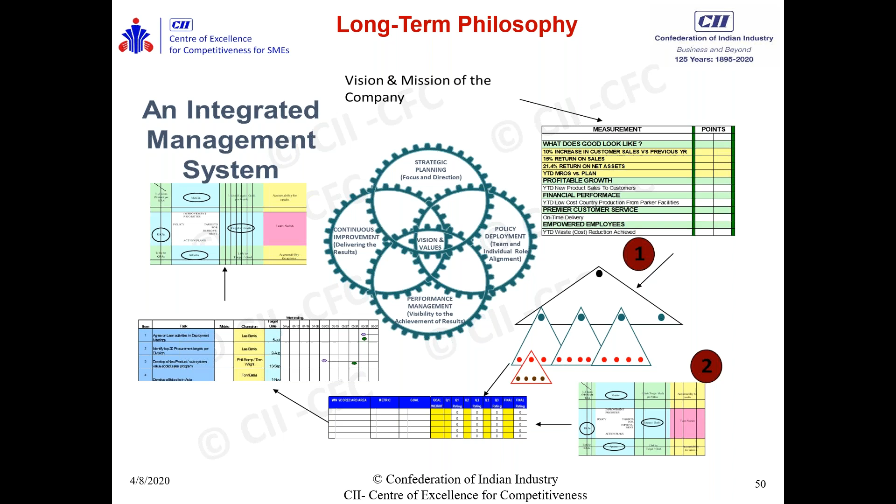So there are different levels of integration. If you ask me, I'll interpret this: this is how, this is how far, this is what, and this is how much, and who will achieve it. So there are 4 dimensions to it.

Hoshin Kanri also talks about the process of critical thinking, breakthrough improvement, Kaizen, daily work management, and retaining the result. I'm not covering too much of this philosophy, but these are important. We call this process critical thinking, or PCT.

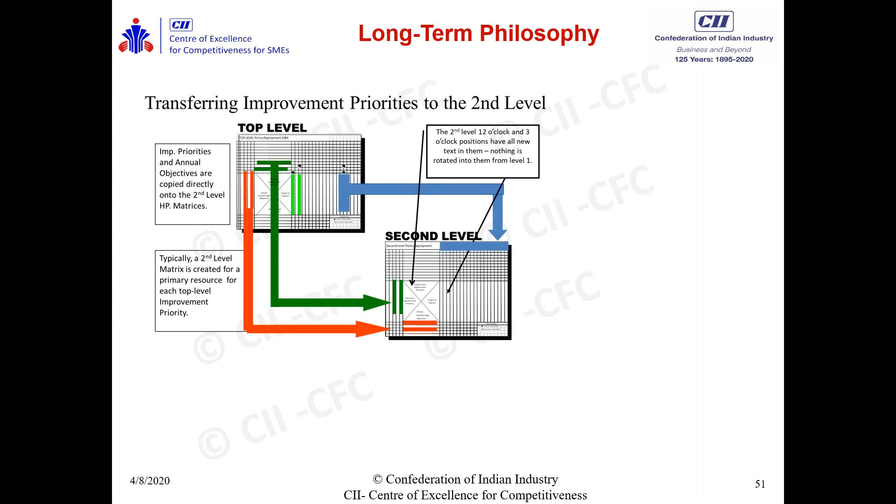It should have yearly plans, PCT and top management linkage, which is called the high performance matrix. This is what the high performance matrix looks like, which I am showing now on the screen.

There are 3 levels of matrix: top level, second level, root level. It is cyclic in nature, in a clockwise direction.

If you ask me how the 'how' part becomes the actual breakthrough objectives: in the second level, how comes to how much, the actual breakthrough objectives. Then how much in the second level comes to what. And in the third level, what comes to how much, and who will be doing it.

So there is a system of rolling out this quadrant to this, to this, to this. Hope you are able to see my cursor, and this to this. So there is a clockwise direction happening while deciding this Hoshin Kanri, or policy deployment, in the organization.

Unless this is there in the organization, the focus goal will not be there in the system. This is very important to have Hoshin Kanri, or long-term strategy to grow, even in all the circumstances which are there in the business.

Today's circumstances are different. In January, all the challenges were different, circumstances were different. Now in March, in June, it will be different. In 6 months' time, the scenario keeps changing. So we should be ready for that, right?

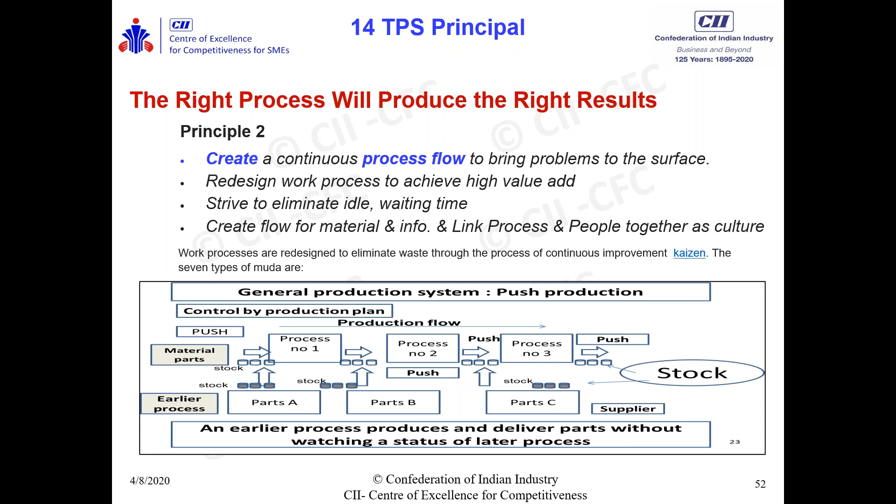We are talking about the full system. This is principle number 2: no inventory in between operations.

If you are reducing inventory, your profitability is going to increase. I guarantee you, if somebody wants to increase productivity, 30% is the minimum target. Many companies take a target of only 10-15%, but even just by starting to talk about the subject, that 10% is going to come.

The point here is there are lots of opportunities available for eliminating waste. Inventory is one of the wastes, and when we talk about waste, there are 7 types of waste. We should get rid of the inventory at various locations in the factory.

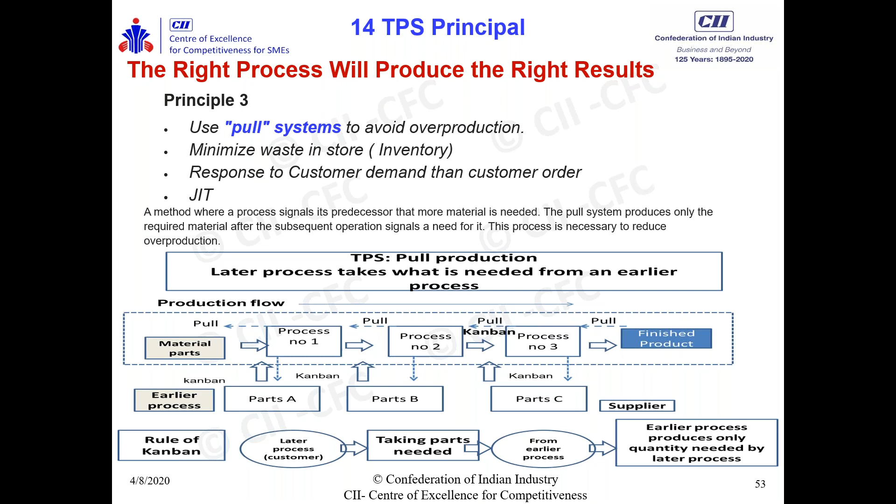Just in time is one of these, which we also discussed quite well in earlier slides. So, leveled out workload - that is heijunka, principle number 4.

That is principle number 4: work like a tortoise, not like a hare. There should be balance - one person working fast, one working slow, that will not be okay.

No unevenness. Unevenness means, like somebody said, a new unskilled person came in. There are 4 people working, and one in between is unskilled - the entire system will get collapsed. There will be defects, and the rhythm of work will not be there.

We need to put that training offline, it should not be done online. What's happening in industry is: a new person comes, and whoever is intelligent among the operators there is told to stand with him and train him. But that operator doesn't know what to teach, how to teach, how to educate. So we should have some proper system for that - it's not just about assigning the person to a trained operator.

So, eliminating overburden.

Many of you must be knowing this - NVA, non-value added activity, and value added activity. Some are essential, but essential activities should be more effective - they should be performed in a shorter time, not a longer time.

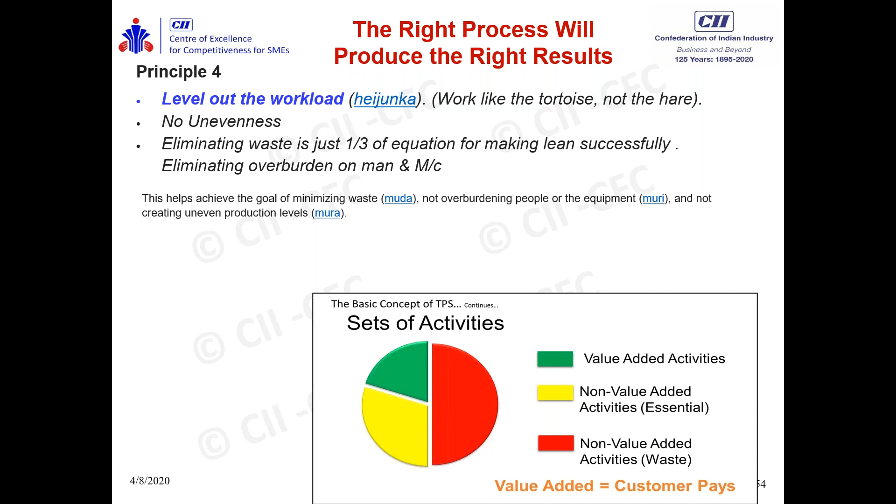Unless you load the component, you cannot do the operation, but loading should not take minutes - it should be in seconds. So we should level the production. Line balancing is one of the tools to level the workload.

Level production is a prerequisite for JIT. Level production means leveling volume and variety. So there is a system for addressing this level production.

We must know PQ analysis, PR analysis - these are part of it, for how to create and put my manufacturing strategy. There are some tools available - your PQ and PR analysis will tell you what kind of manufacturing strategy I should adopt and practice.

If I know the subject of changeover time reduction, I should not implement it everywhere - I should prioritize it. There is a logic behind it.

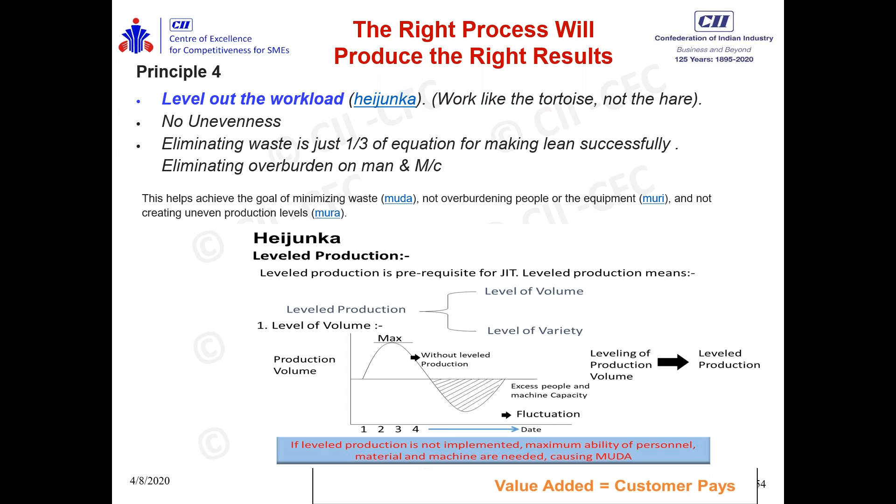This also demands one-man multi-machine operation, which is important to address Muda, Mura, Muri in totality. We have a session on this, please attend.

So we are talking about how right process will produce right results - principle number 5, culture of stopping. Culture of stopping is not only because of quality - any abnormality in the organization, we should stop the line, stop the entire factory, not just the assembly line.

The traditional way is to not stop a line, because managers or engineers are judged by their ability to deliver numbers. Day in, day out, we talk only in numbers - we don't ask how many times we stopped the line. The entire plant should stop - that is what is meant.

Abnormality with respect to the machine not producing the right quality, or running at low speed - we should stop the machine, stop the line. If a machine breaks down, we should stop the entire plant. What is going to happen? This will help us surface the problem.

If you see now, many companies are working on single piece flow - they run on a conveyor with no in-between inventory. Even if one conveyor stops, the entire plant gets stopped, which means the number of people working in the organization has no work - they're idle. This builds pressure, which surfaces the problem, even if it's temporary.

What is happening is we run the plant with the problem - we don't have the dare to stop the line. So we should stop the line for any abnormal things happening in the organization. Stopping the line is not only stopping that particular machine where the problem occurs, but stopping the entire system.

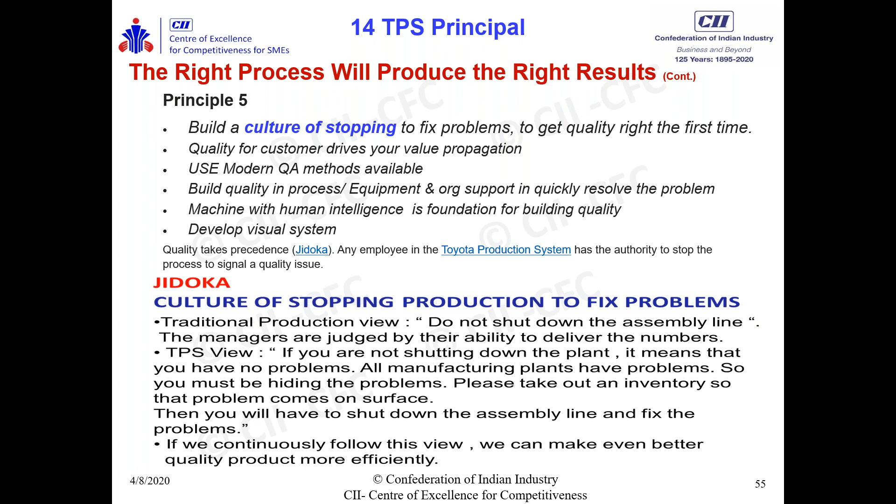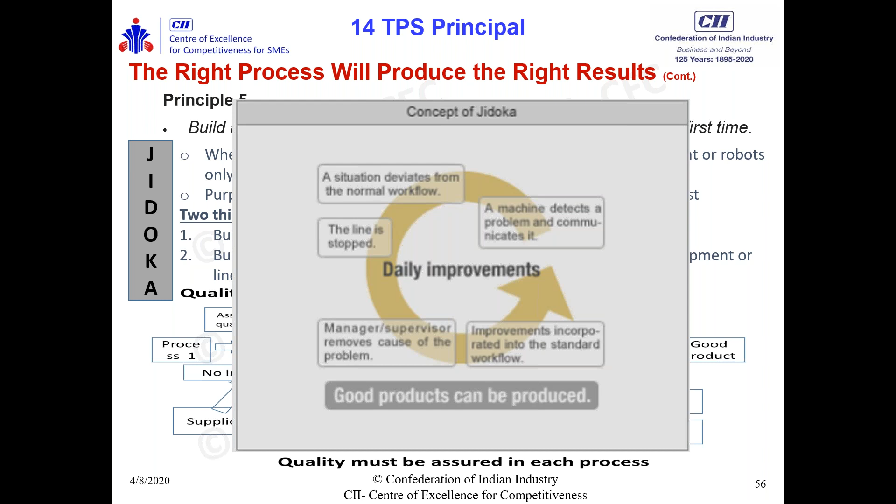So stopping culture - one is build-in quality in the process, which is very much important. Build in a device to judge whether a part is okay or not okay. That should be with the machine. This is again a repeat of what was there earlier. Jidoka talks about the machine detecting a problem and communicating it, and the line stops. That is what Jidoka is - situations of deviations from the normal workflow.

So we talk about visual control. Visual control has a dimension, it's an integral part of 5S, and now we are talking about 6S. Even many companies are struggling to maintain one level of 5S because that requires discipline. Within CII, we develop many new uniqueness in the organization - that is advanced 5S, 5 sense in manufacturing, and many things. The point here is visual control and visual management is very much needed to surface out the problem, to see abnormal things immediately, fast.

So another principle is: use only reliable, thoroughly tested technology that serves and supports the people and processes. Work it out manually before bringing in technology. Don't bring a technology just like that - practice it before building the technology. Do it manually, and then design your own standard of bringing a machine or equipment.

We should also encourage people to get into new technology, because unless we bring new technologies into the system, it will be a hurdle to grow.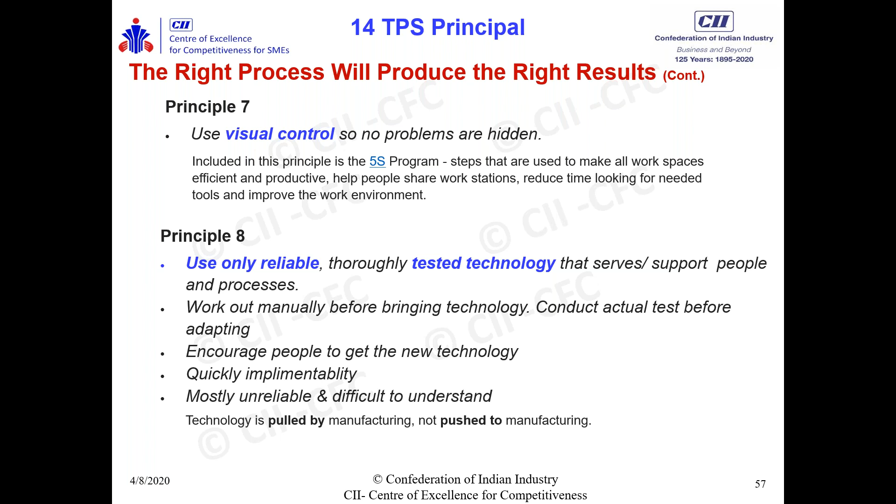So if you ask me in a nutshell, right process will produce right results. The NVAs are 95% in a world-class plant. How much are there in your organization? You should evaluate, and it must be more.

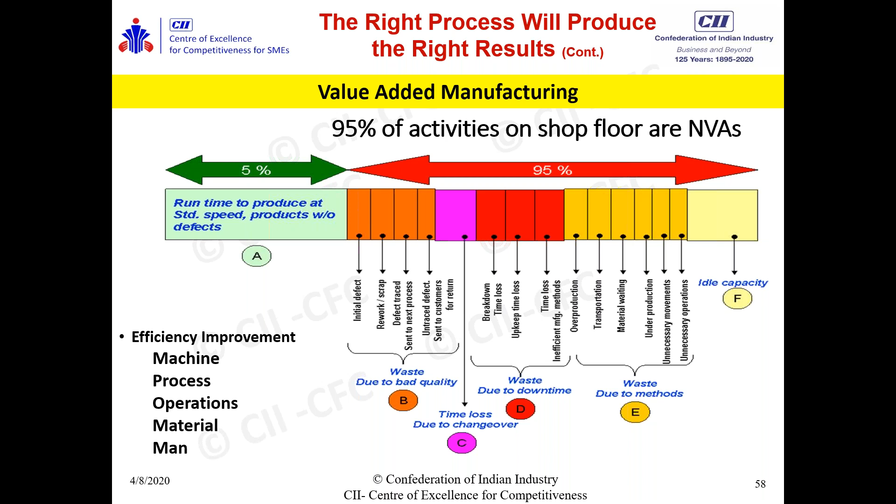So NVA starts from the entire business process. If you map it, it will be 99%, 95%. Efficiency improvement - that is machine, process, operation, material and man. That efficiency improvement is needed across all. How the machines can be improved, machine efficiency can improve, how we can make machines available, how the process can be made more robust, easier, faster, and ease of operation. Material should be available whenever needed - at that point of time it should come to operation. So eliminating NVA is one of the aspects of it.

So if you ask me, right process again gives right product, so you need to understand this input-output relationship. The process has different operations. A set of operations is the process, a set of activities are the operations. And if you really do a detailed study, you will be able to improve productivity.

We have a structured method of doing it. We have got excellent results while practicing this principle of process, operation, activity, and elemental activity - to improve productivity, to improve quality, and to explore automation in the organization. The study is different with respect to productivity, quality, and automation, but the method is the same. So this is the opportunity.

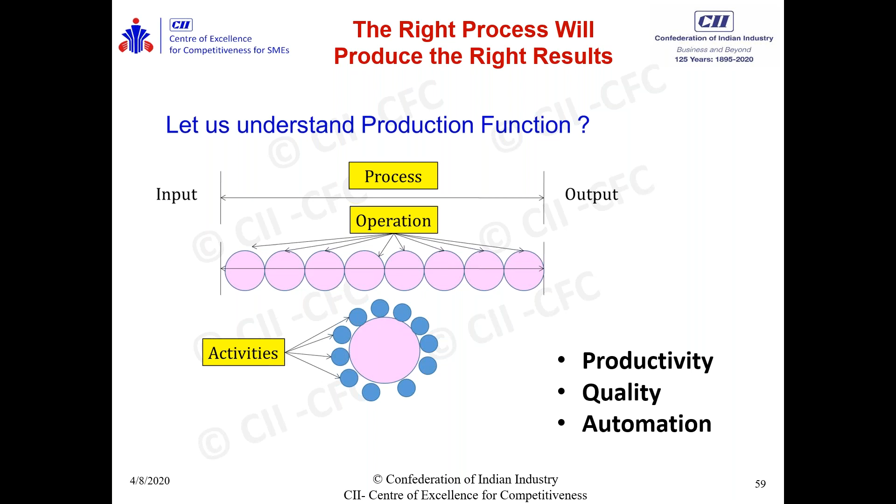What I am trying to tell here is, if you are addressing this, there are n number of NVAs in the organization which can be addressed to get rid of them - all the NVAs. Standardized tasks are very much important to get reliable repeatability in the organization. This is one example of time study - there are many standards needed to get repeatability and reliability in operations.

Now, if you ask me, one example is standardized task. The operator is making a product, but the SOP written in front of him and what he is performing is different. The reason is it is not getting aligned with the way the work is happening. The SOP is written in isolation and the work is happening on the shop floor.

That is very much needed. Just try this in your factory: if I ask you to make one pig or elephant picture, somebody will be able to make it, somebody won't. And among those who can, somebody will make a 2-inch size, somebody 1-inch, somebody big, somebody thin. So there is no uniformity. But if you use one standard, any elephant you draw will have 99% similarity, because it goes through a standard. So we should adopt this.

Grow leaders, this is the principle: add value to the organization by developing people. That is one of the P's we are talking about. Grow leaders who thoroughly understand the work, live the philosophy, and have the ability to teach others. So when we talk about leaders, it requires competence. There are various competencies, competence mapping. I won't name them, but make them more visionary.

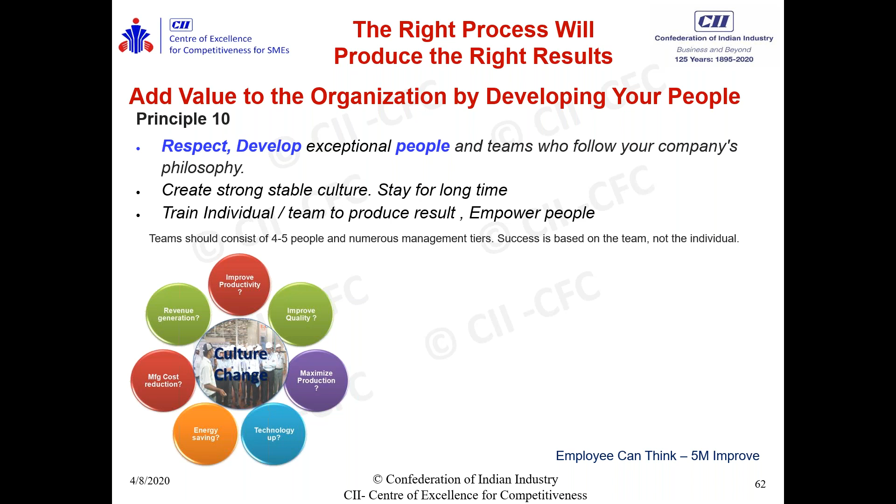So we should be ready with this. We need to develop people, we need to respect people. We should do many things for the people. This is all about quality of life today, not only roti, kapda, aur makan, which was the focus in early eras of manufacturing, right? So train individuals and teams to produce results, empower people. This is all needed.

We talk about reward and recognition, we talk about TEI, we talk about the requirements that must be met: a healthy atmosphere for the employee, development of people, bringing them to the next level is also needed. This is all about TEI, total employee involvement - employee involvement in totality, across various aspects. We need to address that.

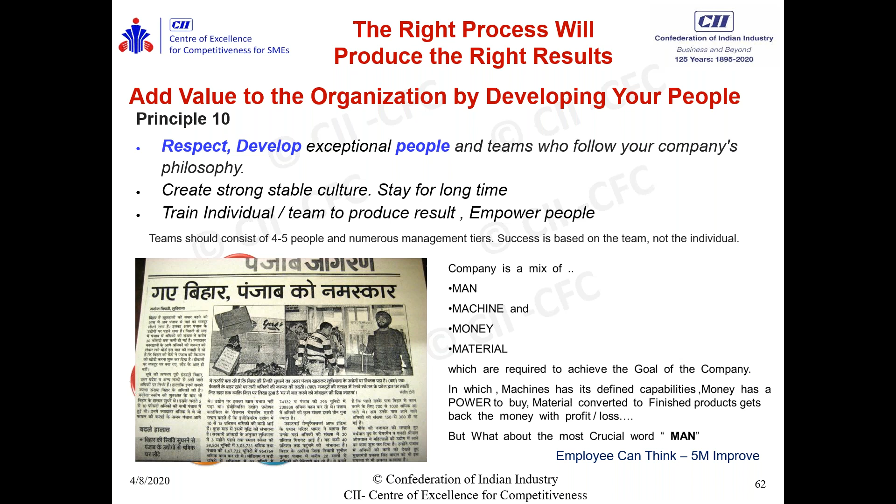So retaining people is very, very important. This is a very vast subject. If somebody wants to join, we can design a program for you, which is already available but not part of this series. If somebody wants, they can put in a request after the session.

Value adding, extending support, developing partners and suppliers is very much needed, because if I am the OEM, I need to build reliability in the entire supply chain. If I'm giving to the market, I need to build that trust in the market. So how to build that, that also we should think about. Many companies do these activities, developing their own suppliers, developing suppliers as partners. We need to do this.

Go and see for yourself - that is continuously solving root cause problems in the organization. There are three G's associated, which I already told you: Gemba, Genchi, Genbutsu. Go to the spot, that is the workplace. See the actual problem. Genbutsu is to take realistic action which will help you solve the problem. So there are steps available, and there are various problem solving tools available.

We should practice it, and many companies are practicing it. They are participating in various competitions, which you could able to see. But the important thing is when there is a problem, we should be adopting this 3G concept, which is minimum. Many people are not even able to frame out the actual problem statement, which I witnessed across India - big, small, all types of companies. It's not like only big, small companies have a problem, but we need to practice.

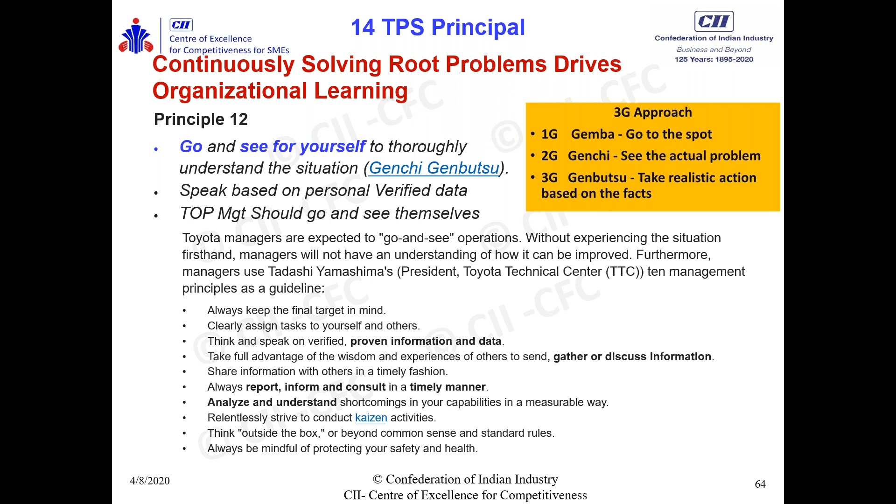How many of you have this root cause analysis hard copy available for the operators? Writing a problem and doing an analysis in their own language, Marathi, Hindi, English, whatever. There are steps available for this, but the principle is go and see yourself thoroughly.

Top management should go and witness what is happening there on the shop floor - whatever we are doing, continuously solving the root cause of the problem, identifying a root cause and problem solving.

Decision making is very, very important. Make a decision slowly by consensus, thoroughly considering all options. There is a tool available - option analysis - for all the problems. We do a brainstorming, that is what is Nemawashi - there is a process of discussing a problem and potential solution with all the areas which are affecting or having a problem, that we should do.

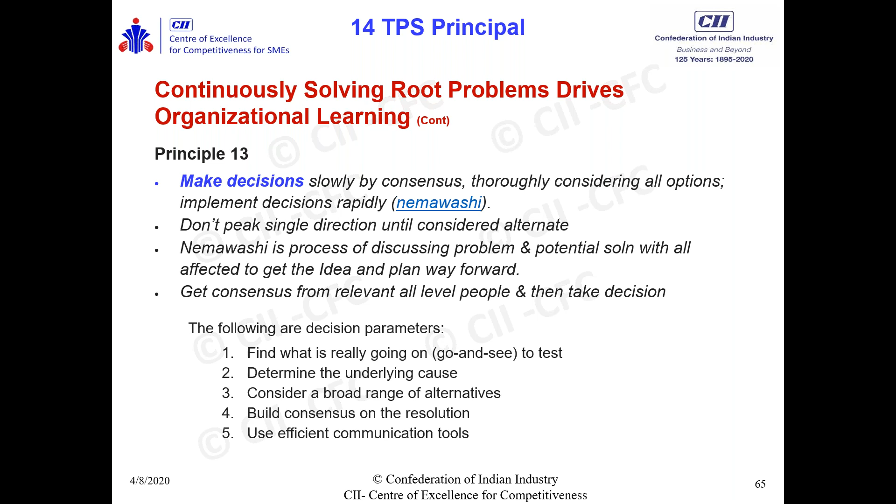Taking a fast decision, which is a consensus one, we should have collective discussion happening, which is constructive. One of the tools is brainstorming. There are many others that should get adopted, and we should do this.

The last one, the 14th principle, is we should be a continual improvement organization. So when we say continual, we should have a hunger to learn. We should be a learning organization. All the people should learn and unlearn - many people talk about it. So every individual can contribute to this. This is what is a cultural change, which is continual in nature, which is important and should be a priority.

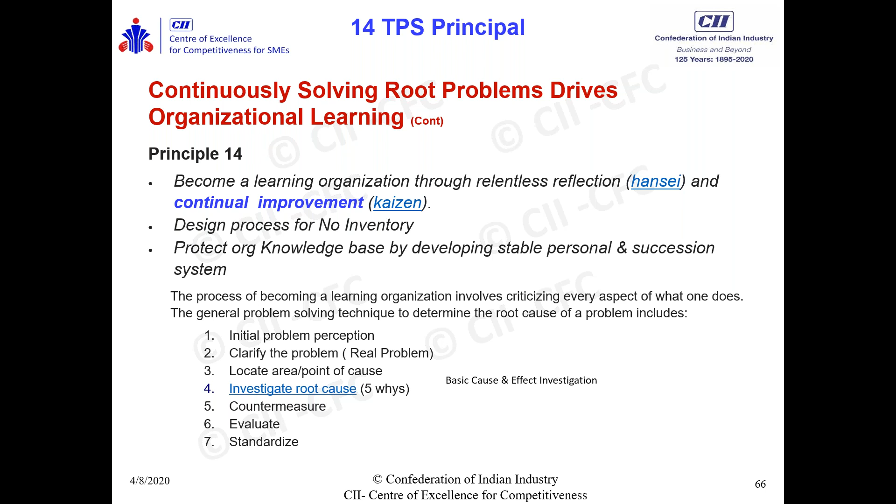So again, if you want to do this, learning and understanding is very, very important. Please attend the webinars, attend the trainings which are planned. Whenever you get an opportunity, please learn, understand. The most important thing is to adapt and practice, to become more competitive.

So in both the green and yellow areas, we do help industry across. Being a CII, it is our responsibility to handle the industry, to give the best to our industry, to get the maximum result from the industry.

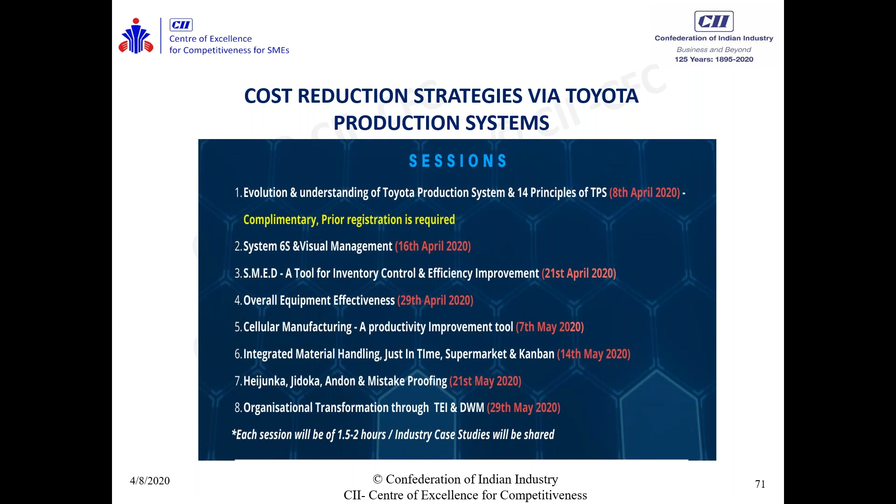Even if you know SMED, please re-understand this, relearn this - it's an investment of your time. So we have a series of programs available with you. Please register for it, I don't know how many of you are registered.

So these are the things which are in line with TPS. This is what I am going to deliver on building profitability and adding enablers for business growth. Please register for this date - this is only a 2 hour session. We'll give a glimpse of what all you can do, you can just see the benefits. So Himanshu will definitely send you this circular.

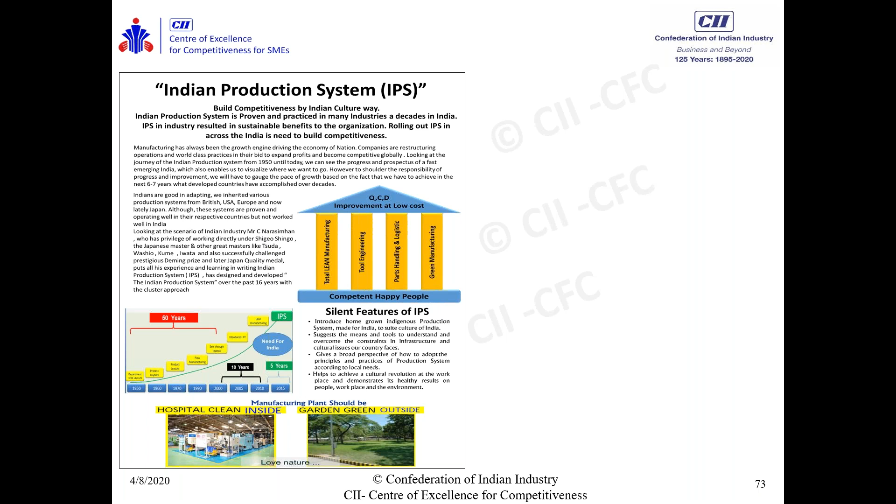Another thing we are planning to do is Indian Production System. Now we talk about TPS, Lean and all - our culture is different, American culture is different, Japanese culture is different. Please understand our own strength, use that strength, we can make a miracle. So we have a topic of total lean manufacturing, green manufacturing, tool engineering, parts handling - challenging your own tooling management, challenging your own machines.

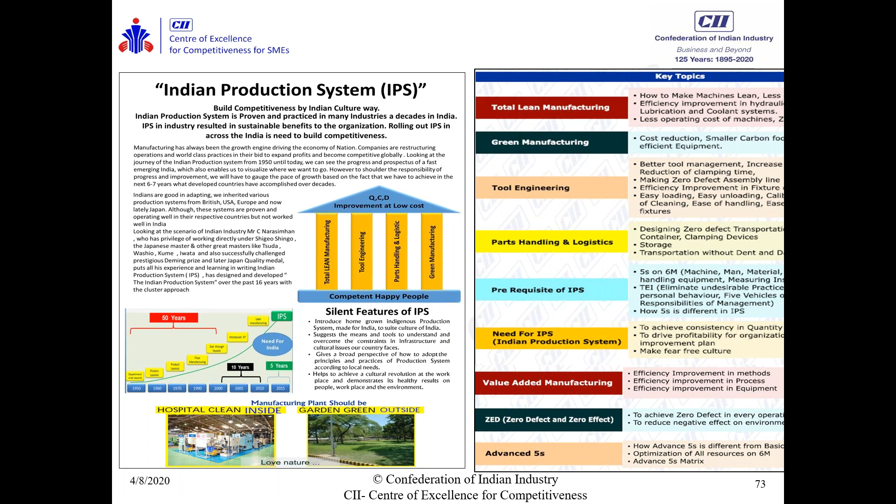That is what we are going to deliver, which we have already done. It will be coming up as IPS, as one drive there in India. So people are talking about lean, we are talking about even along with the lean machines. Many companies, one of our companies, has cut the machines. We are challenging electrical panels, we are challenging hydraulic. There are many such cases available.

Please witness this. This is planned: IPS is planned on 24th April, 17th April is building profitability and risk management along with the business, which is fire hazard, that is 4th May, root cause analysis we talk about, which is not there in that TPS flow, but you should attend this. This is very, very important. One of our colleagues is going to deliver his master class in that.

Value stream mapping - we are thinking whether we should do a value stream mapping webinar or not. Very difficult, but we are trying to give you the best out of this. So please do attend, register yourself.